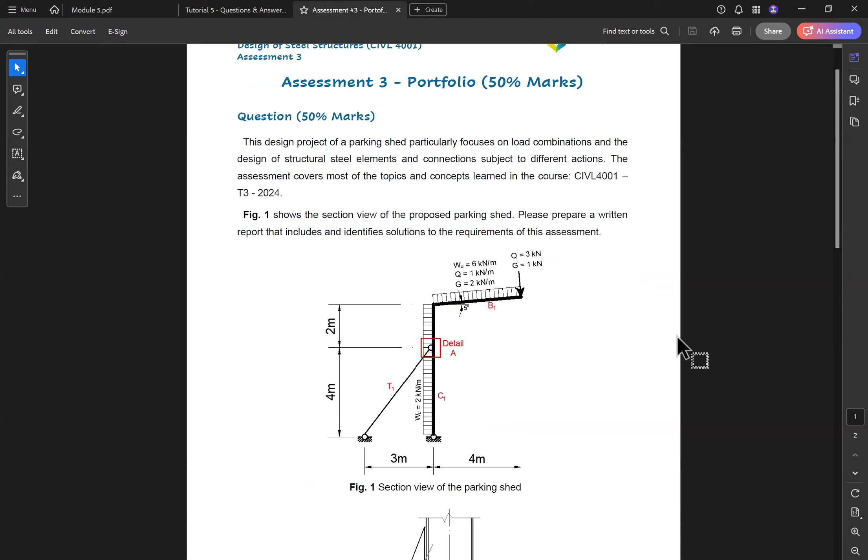Yeah, okay, so this is the quiz. It is not a very long one, sorry, this is the assessment portfolio, the last one we have in this course. So it's about calculating the load combinations and designing members. So we have some members, like T1 is a tensile force member.

And the column will be under normal force and bending moment, similar to what we will do today. And also we have a rafter or beam, and we also have a connection. So module 6 designs a connection connecting the column to the tie. Okay, so this is mainly the requirement of the assessment.

And also, one thing here is, using the loads, we need to draw the shear force diagram, bending moment diagram, and normal force diagram, and we need to check it with Space Gass software. You mentioned before that you have used Space Gass before, right?

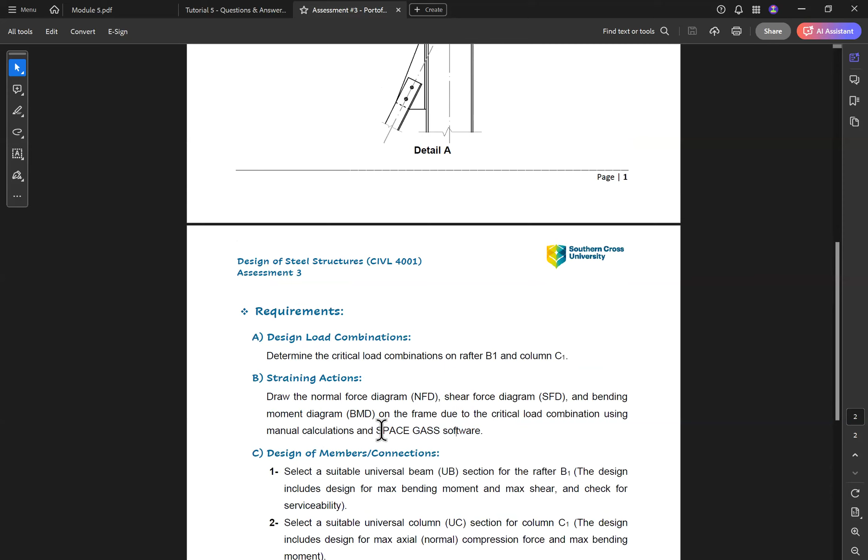Yeah, I used it a little bit, not too much. Only for the truss and joint. Yeah, it is a simple one, so I can help you draw the model, but just to link you to check your manual calculation with the software. Okay, yeah. Okay, and others, have you used the software?

I think you mentioned you have used it before, right? Or not all of you? Not Space Gass, but I've used Strand. Okay, same. Okay, so I can edit it and add Space Gass or Strand 7.

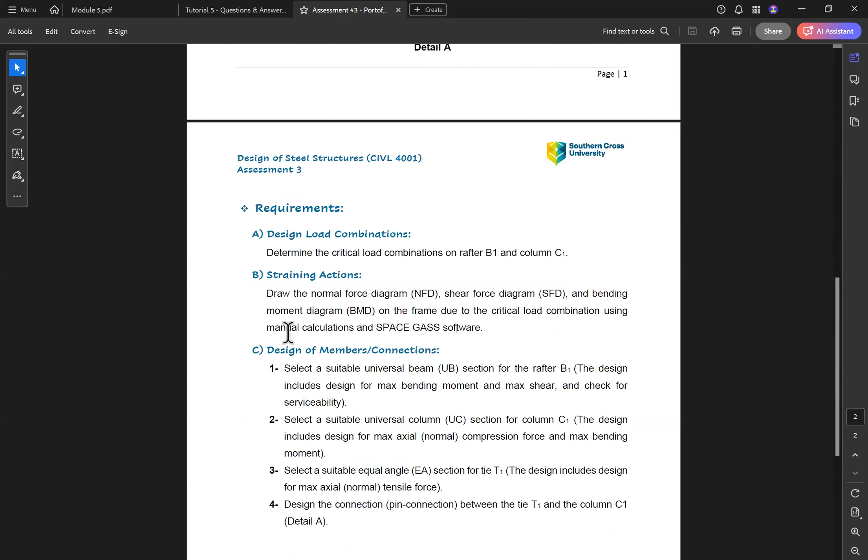I also have another question, if that's all right. At the top it says please prepare a written report, so do you want it to be a written report or only calculations? It just means do the calculation and so on. So you're only interested in calculations, we don't need to write an introduction or anything like that. Okay, just the calculation and the requirements only here. So what about explaining the critical load combination? Yep, calculations, no need for an intro and all that stuff. Okay, great, thank you.

So now let's start our topic for today. Today we will be looking at design of steel members subjected to combined action, similar to portal frames or frames in general.

Combined action means that we have two actions at the same time, for example axial force or normal force similar to a column, and also bending moment. This will happen mainly in frames, because the column and rafter in frames will have both of them. So this case is named combined action.

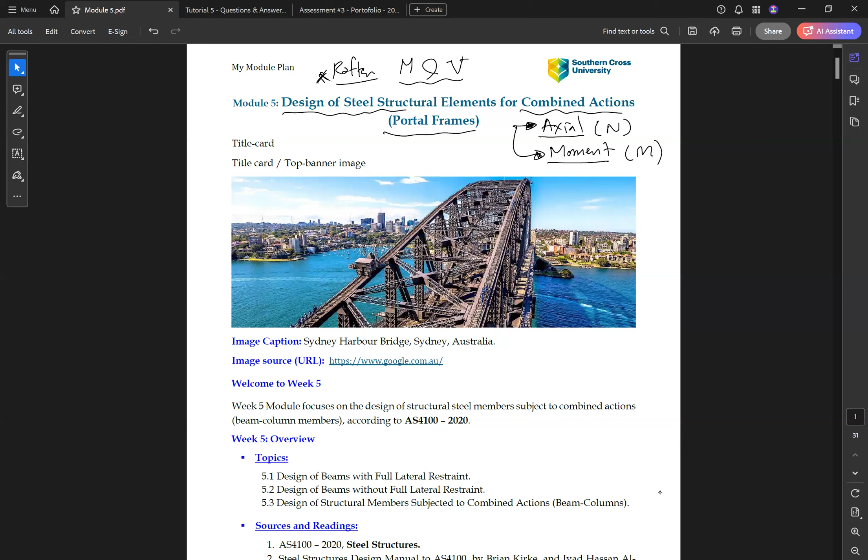There are several types of combined action, for example in rafters, sometimes we need to check the moment and shear together. This is also a type of combined action. So this is mainly our topic today for the week 5 module.

We will start with designing beams with full lateral restraint and design of beams without full lateral restraint, because last week we only talked about beams or rafters subjected to moment, but only with full lateral restraint. So here we will also talk about cases without full lateral restraint.

The third part is design of structure members subjected to combined action. These members can be called beam columns, and mainly in the combined action we have axial force N and moment M. These are the main actions we have. The sources for this module are the standard and the two reference books if you want to have a look at them.

So let's start with the design of beams with full lateral restraint. We have segments with full lateral restraint, according to clause 5.3.2 in the Australian standard. A segment may be treated as fully laterally restrained if it satisfies one of the following clauses, where the nominal member capacity calculated in accordance with clause 5.6 is not less than the following.

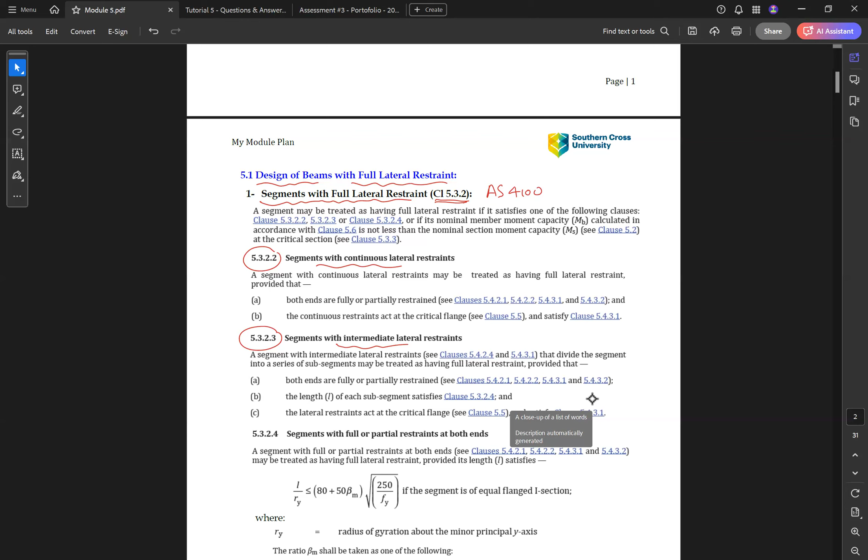Under this case we have two types: segments with continuous lateral restraint and segments with intermediate lateral restraint. For segments with continuous lateral restraint, these may be treated as having full lateral restraint provided that both ends are fully or partially restrained, and the continuous restraint acts at the critical flange.

The other case is segments with intermediate lateral restraint. A segment with intermediate lateral restraint that divides the segment into a series of subsegments may be treated as having full lateral restraint, provided that both ends are fully or partially restrained, the length L of each subsegment satisfies this clause, and the lateral restraint acts at the critical flange.

The idea here is about buckling, or global buckling of the member. As you know, when we have the beam cross section, it may be subjected to buckling.

We talked about this last week, so we might have something called, let's change the color here, so this one here - the section might be subjected to lateral torsional buckling, or LTB.

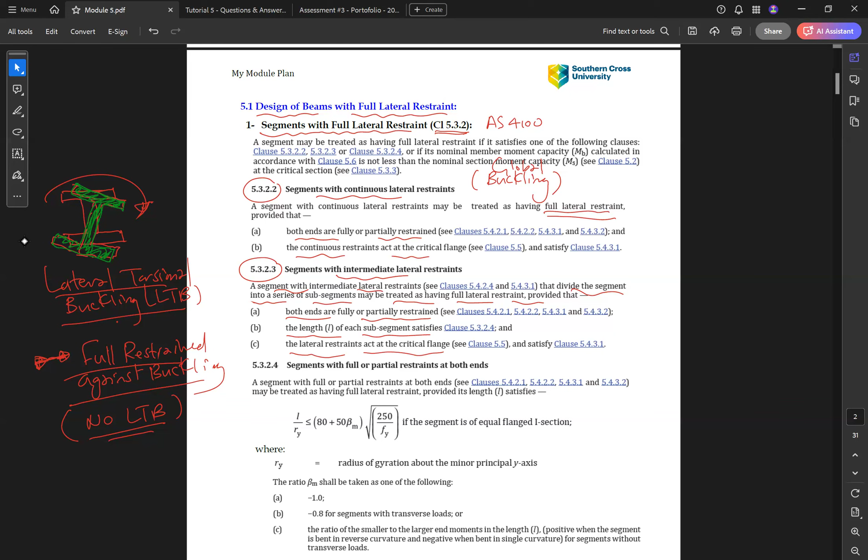We will see later how to apply this in the problem or the design. But if the segments are fully or partially restrained to satisfy these three clauses, or the continuous restraint acts at the critical flange - for example, if we have this section here, let's explain this.

If we have this beam and we have the moment like that, this bending moment, the critical flange in this case is the top flange because it is under compression. So if we have something to support the beam from both ends here, this is what is meant by lateral restraint. The beam is restrained, or the top flange is restrained, from displacement or rotation.

Okay, so the next clause is segments with full or partial restraint at both ends. Such a segment may be treated as having full lateral restraint if this condition is satisfied: L over Ry less than or equal to 80 plus 50 beta m root 250 over fy, if the segment is of equal flange I section. So again, if we have an equal flange I section similar to this, this formula applies.

Where Ry is the radius of gyration about the minor axis. So if we have two axes, this is the x-axis and the y-axis, so y is the minor axis and x is the major axis.

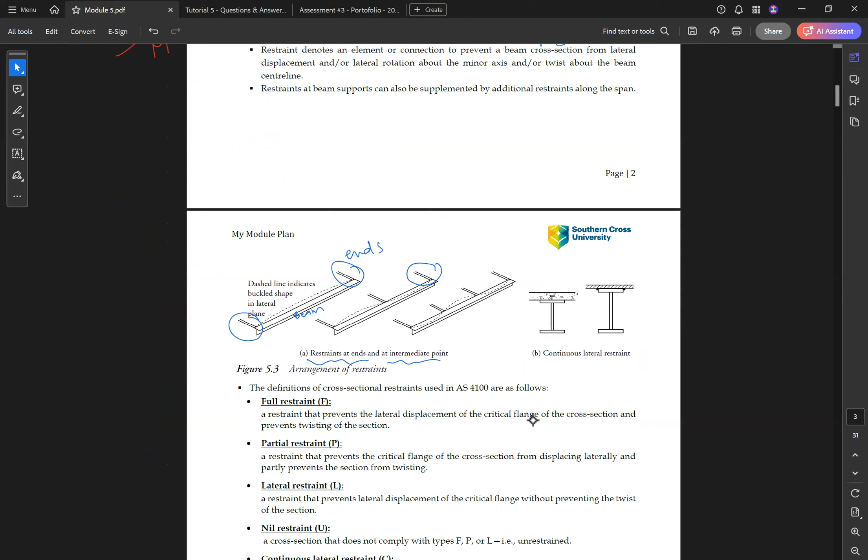If we have full or continuous lateral restraint, or intermediate, or full or partial restraint at the ends. Here is some explanation: restraint at ends and at intermediate points. So if this is our beam, here we have supports at the ends. Here we have two supports at the ends and one intermediate here. And here we have two at the ends and two intermediate. So this is what is meant by full or partial lateral restraint.

Restraint denotes an element or connection to prevent the beam cross-section from lateral displacement or lateral rotation about the minor axis, or twist about the beam center line. So this is to prevent or reduce the lateral torsional buckling. Restraint at beam supports can also be supplemented by additional restraint along the span. So you might have restraint at the two ends, or you can replace them with some restraint at the span.

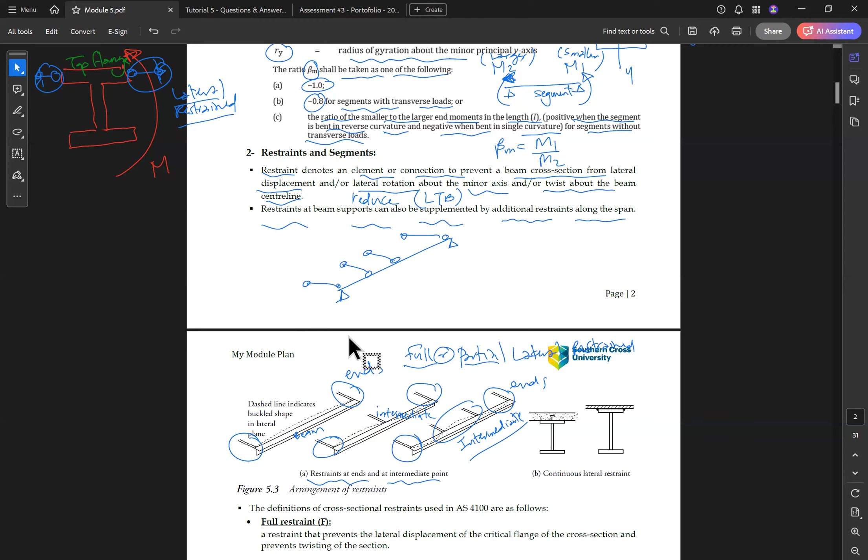Okay, in the standard, we have some definitions for the cross section. So we can have a section of full restraint or partial restraint, because this will affect the design, this will affect the design formulas in the standard. So we can have full restraint section, partial restraint, and we also have lateral restraint, and we have nil restraint or continuous lateral restraint, and lateral rotation restraint. So that's 6 definitions we need to know.

So for full restraint, take the symbol F. It is a restraint that prevents the lateral displacement of the critical flange of the cross section and prevents twisting of the section. So if we have a restraint that prevents all the lateral displacement, this is considered a full restraint section. Partial restraint, or P, is a restraint that prevents the critical flange of the cross section from displacing laterally, and partially prevents the section from twisting.

So partial restraint means we prevent displacement fully or completely, and prevent twisting partially. Full restraint prevents displacement and twisting fully.

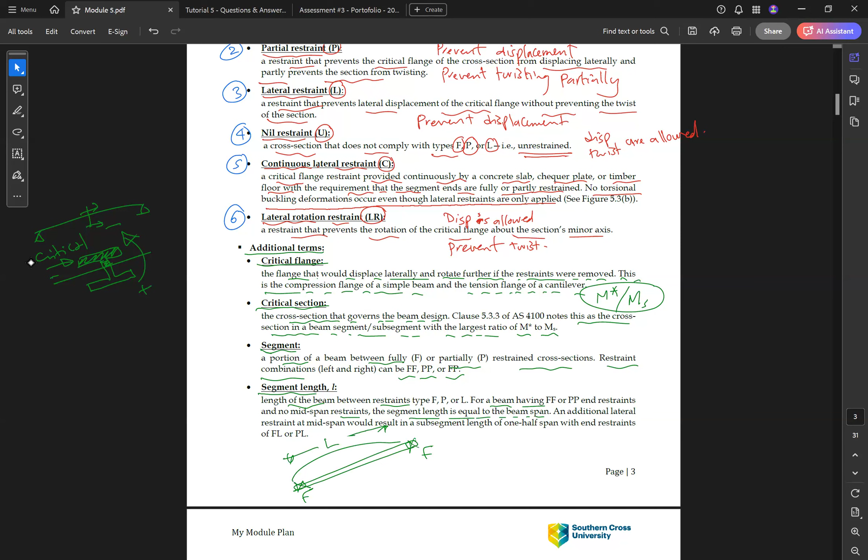Segment length L is the length of the beam between restraint types, whether fully, partially, or lateral restraint. For a beam having FF or PP end restraints and no mid-span restraint, the segment length equals the beam span. So if we have a beam with this end F and this end F, and no other intermediate restraint, the segment length here is L, which is the beam length.

An additional lateral restraint at mid-span would result in subsegment lengths of one half span each, with end restraint FL or PL. So if we have the same beam, fully restrained here and here, but we add a lateral restraint in the middle, this is L by 2, or the segment span, and the connection now becomes FF with the middle as L. So this segment is FL, segment 1 is FL, and segment 2 is also FL.

So the segment length, or the segment span, is affected by whether we have lateral support or not for the rafter.

A subsegment means the segment can be further subdivided into portions having at their ends at least lateral restraint L to the critical flange. Restraint combinations can again be FL, PL, or LL.

So if we have two middle lateral restraints, the segment can be subdivided into subsegments. So this can be subsegment 1, subsegment 2, and subsegment 3.

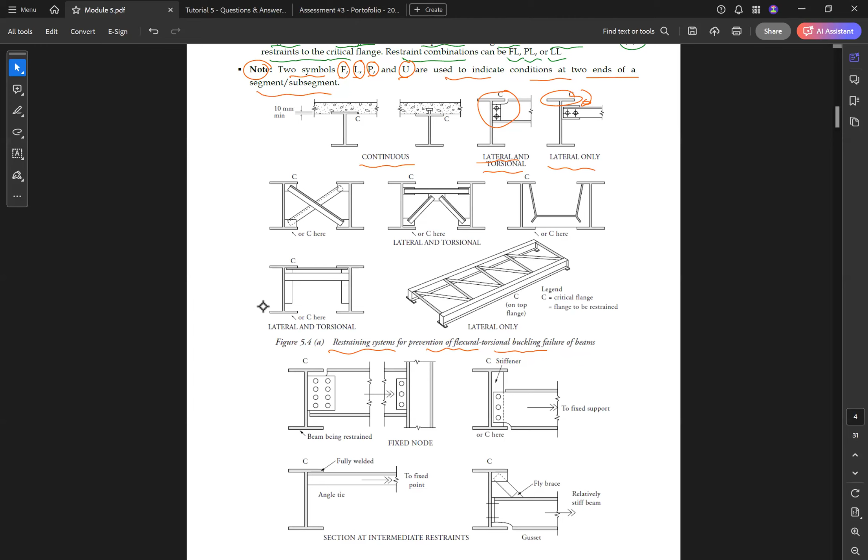Okay, so these are a few examples you can have a look at, and also here some other examples for the full restraint for beams.

So here, one example: we have an angle welded to the top flange, so the top flange is fully prevented. Here as well, we have a fly brace connected to the top flange, also preventing the lateral rotation and the lateral displacement.

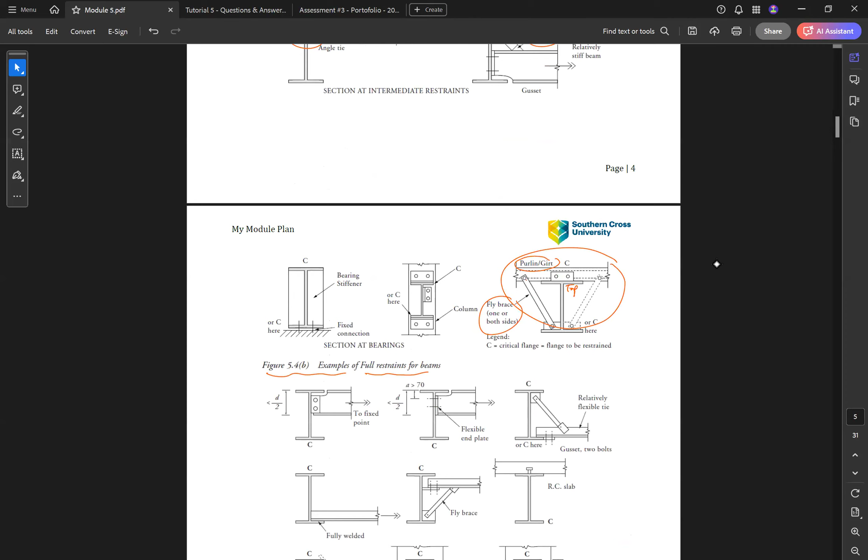Here as well, we have this connection. So here we have fly bracing and a purlin connected to the top flange, so the top flange is not allowed to move, whether horizontal displacement or rotation. And here this diagram, 5.4c, is also another example for partial restraint.

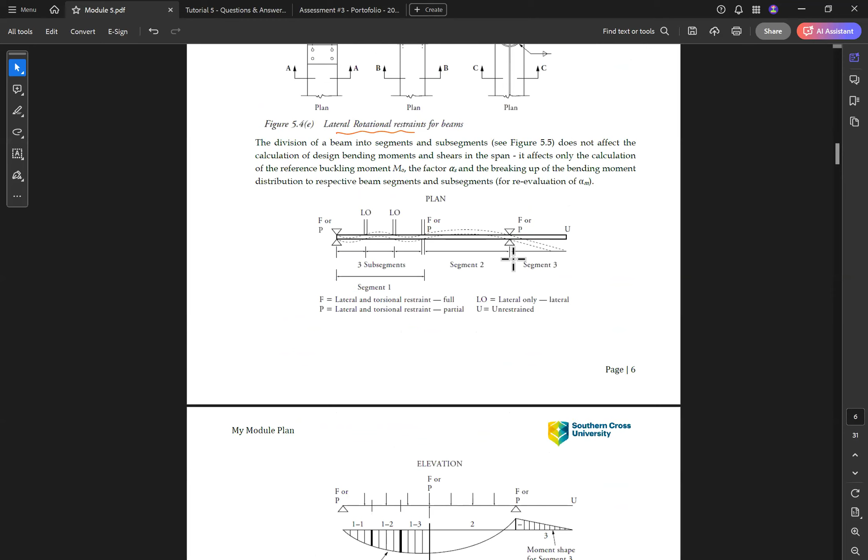The division of a beam into segment and subsegment, similar to figure 5.5 here, doesn't affect the calculation of the design bending moment and shear in the span. It only affects the calculation of the reference buckling moment M naught. So this division or subdivision will not affect our calculation for moment, but it will affect the buckling capacity of the beam itself, which is M naught. We will have M naught in the formulas later - the factor alpha S, and the breaking up of the bending moment distribution to respective beam segment and subsegment for reevaluation of alpha M.

So the factor alpha S is just a breaking up of the bending moment distribution. So it reflects the redistribution, or the distribution, of the moment on the beam segment.

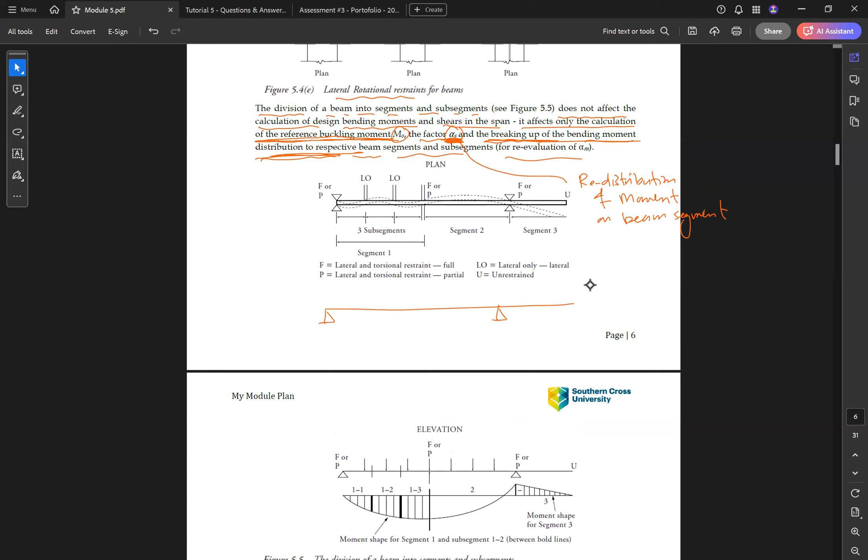Okay, similar to this example here. So if we have this type of beam - this is the elevation, this is the plan view, and this is the elevation view. In the elevation, we have a simple beam with a cantilever. If we have some loads like this, the bending moment will be something - this is just an example. So we have negative moment here, positive moment here. This is the bending moment, similar to this diagram here.

But in the plan, if you look at the plan view, we have full or partial support here, no support here horizontally, and also full or partial support here, and lateral supports here, and full or partial at the middle here. So the buckling of this one in the horizontal direction will follow something like this dotted line, or this blue line. So this is what is meant by segment. The segment only affects the horizontal direction, or the lateral torsional buckling. But for the bending moment, or vertical bending moment, there is no effect from the segments.

So this is what is meant by this statement here. If we look at the subdivision, we have this is a segment, this is a segment, this is a segment, this is another segment, this is another - so we have segment 1, segment 2, segment 3, segment 4, segment 5. So this is our segments. This subdivision will only affect the horizontal direction.

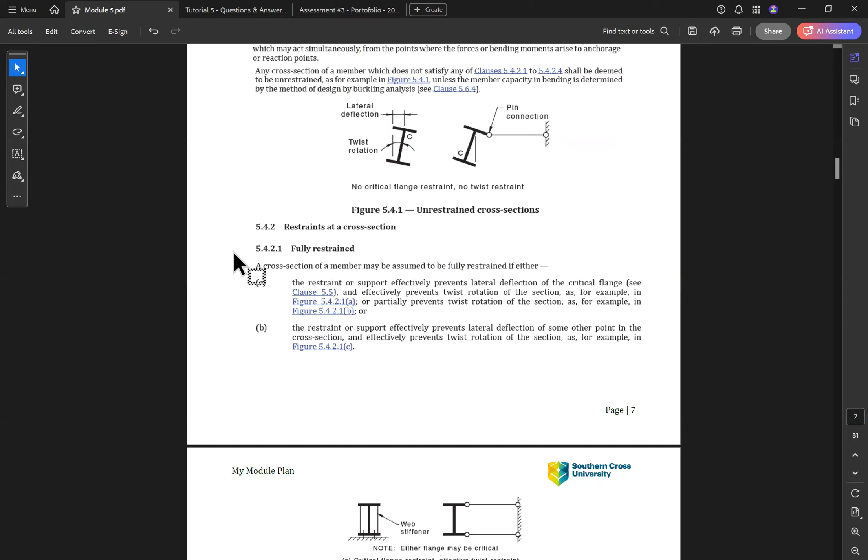Do you have any question, guys, up to now? Nope.

Okay, so thank you. So to continue quickly, this section also gives us the restraint definition in the Australian standard. For example, this gives us figure 5.4.1, unrestrained cross section. In this unrestrained cross section, there is no restraint, so the deflection is allowed and the twisting is allowed.

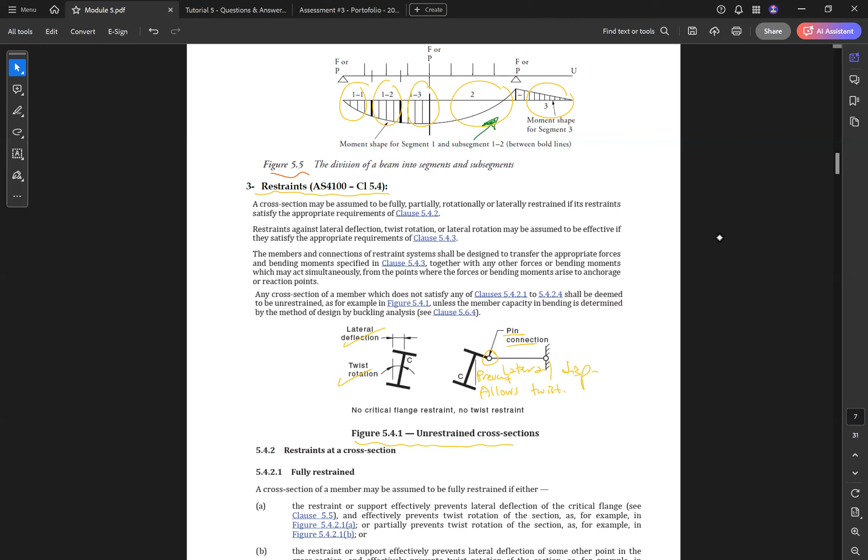Another type is we have a pin connection. When we have the pin connection, this will prevent the lateral deformation, but the twisting will stay. So if we have a pin connection, this can prevent lateral displacement but allows for twisting. So this is the general case where we don't have any restraint.

And the fully restrained - this standard gives us some examples of fully restrained. Here, the critical flange restraint, effective twist restraint. So if we have a connection at the top flange and bottom flange, this will prevent displacement and also twisting. And here also there is a connection of the critical flange to the slab or so on, and also we have a web stiffener. So this is another example of fully restrained.

On this one, we have critical flange restraint, but partial twist restraint. At the top here, we have a flexible connection, so the member is flexible. So this cannot be considered as fully restrained, but it can be considered as partial for twisting. And because the connection prevents the movement, or horizontal movement, of the beam, it is not allowed for displacement.

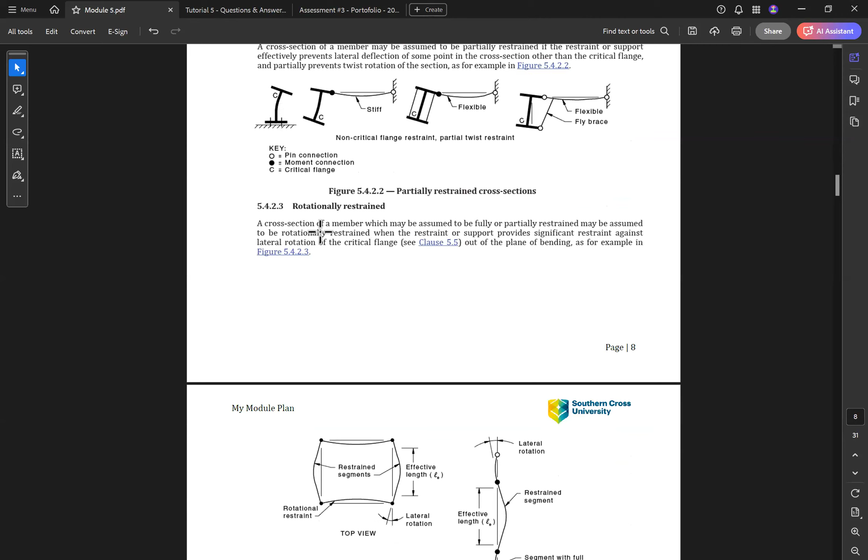Okay, so these are just a few examples of the definitions exactly as in the standard. You can have a look on this. It's just a repetition of what we made earlier: partial restraint, rotational restraint, and so on. So let's go to the...

calculation or the procedure of the bending moment capacity for the beam. So member capacity of segments with full lateral restraint is our first step. If we have the beam with full lateral restraint, we have to follow this procedure. The first thing is calculation of the nominal member capacity, MB, of a segment with full lateral restraint, which shall be taken as the nominal section capacity of the critical section.

So to simplify this, for rafters or beams we have two capacities: the section capacity of the beam, and the member capacity of the rafter or beam. The section capacity MS and the member capacity MB. So if we have full lateral restraint, this means there is no lateral torsional buckling, and this makes MB, the member capacity, equal to the section capacity. So the nominal member capacity equals the section moment capacity for full lateral restraint.

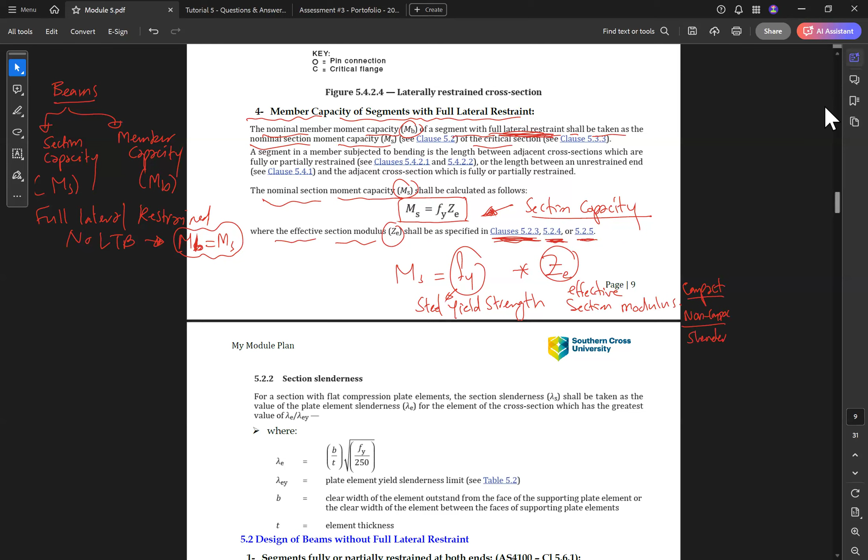Okay, which is the effective section modulus based on these three clauses: one of these three clauses, if the section is compact, non-compact, or slender. So we have these three types of sections: compact, non-compact, and slender.

The section slenderness, lambda, for a section with flat compression plate elements shall be taken as the value of the plate slenderness lambda E for the element of the cross section which has the greatest value of lambda E over lambda Ey. So we'll have lambda effective for flange or lambda effective for web based on this. If it's flange, B flange over T flange, times F yield over 250. For web, B web over T web, times F yield over 250. And we have the plate yielding limit slenderness from table 5.2.

Then we have lambda E over lambda E yield for flange and lambda E for web over lambda E yield for web, and the value of the plate is the greatest of them. So we'll calculate both, and for the section, lambda E will be the greatest. Because the section consists of flanges and webs, we calculate for flange and for web, and the whole section value will be the greatest value of them.

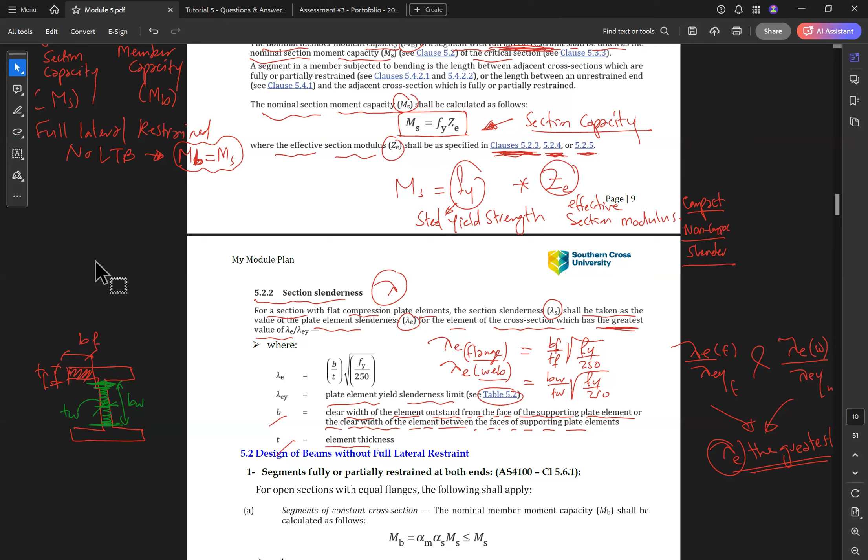So for the first case, if we have full lateral restraint, there is nothing new compared to last week. We have MB equal to MS equal to F yield times Z effective, and Z effective is based on lambda E over lambda E yield. So we have three types: compact section, non-compact section, or slender section. Based on this, you can find ZE and then you can find MB.

The new part this week is the design of beams without full lateral restraint, which may be a common case if we don't have full lateral restraint for the beam. So the value of MS doesn't equal the value of MB. So what do you expect—MS more, or MB more than MS?

Do you have any idea? Nothing? Okay. Because MS is the section capacity, this is the maximum that the section can achieve. So MS will always be more than MB in the case of no full lateral restraint, or beams without full lateral restraint.

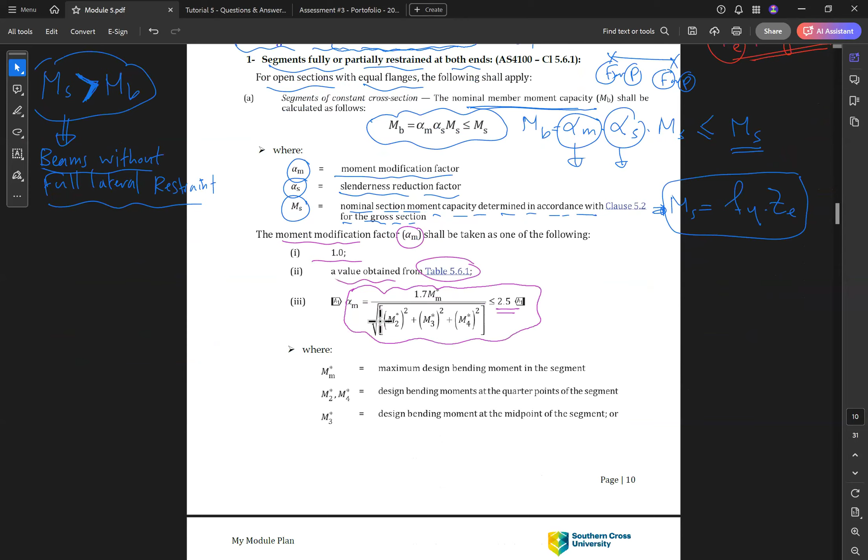Okay, so we can take table 5.6.1. Let's have a look at this table. This is table 5.6.1, the moment modification factor alpha M for a segment fully or partially restrained at both ends.

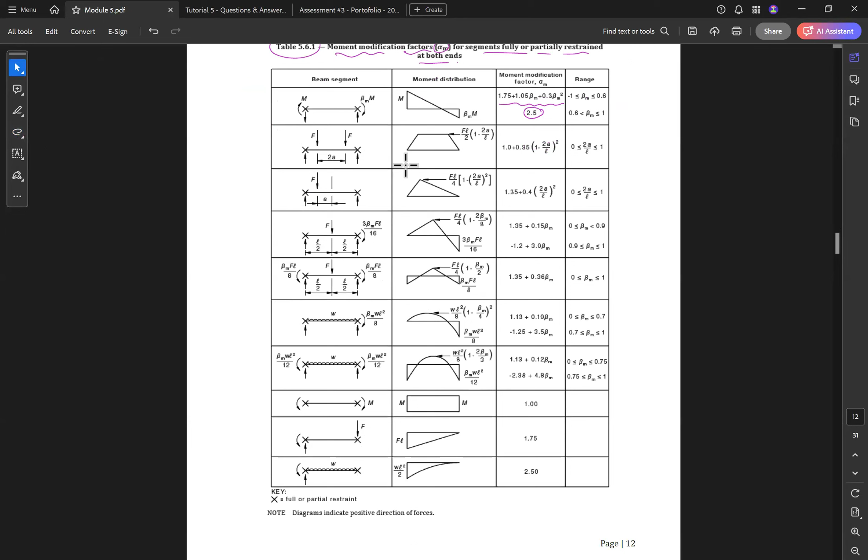Here is an example. If we have a beam with two moments, M and beta M times M, this is the moment distribution, so this shall be the value of alpha M, and not more than 2.5. All these cases, one of them shall be taken depending on what is the moment distribution on the beam segment here or here and so on. Take the value of alpha M depending on your case.

The general formula is alpha M equal to 1.7 times M star M over the square root of M2 star squared plus M3 star squared plus M4 star squared, all under the root, where M star M is the maximum design bending moment in the segment, M2 and M4 are the design bending moments at the quarter points of the segment, and M3 star is the design bending moment at the midpoint of the segment.

For example, if we have a beam with a moment distribution like that, the maximum moment in the middle is M star, and M2 and M4 are located if this is L, we have 4 quarters: L over 4, L over 4, L over 4, L over 4. So this is M2 and this one is M4 star. In this case, M3 is the design moment at the midpoint, so M3 star equals M star. This is just a simple example of the segment if we have a bending moment similar to this.

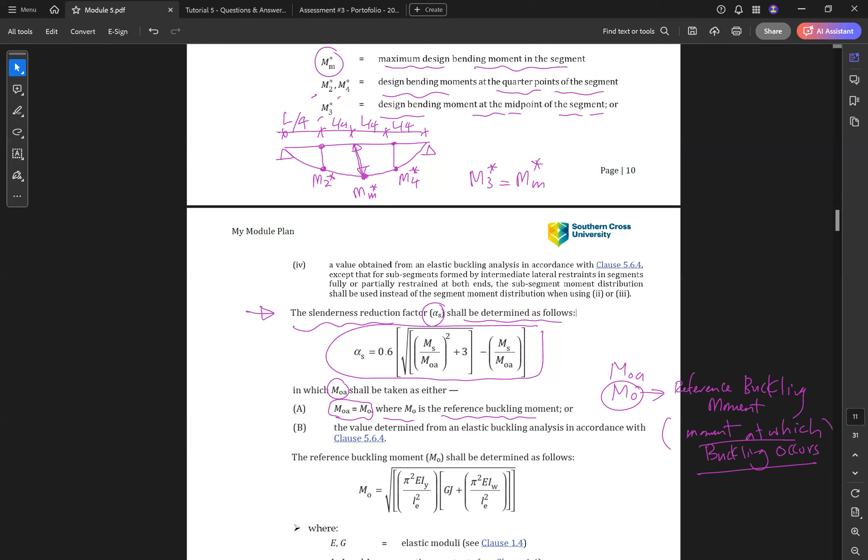Where MOA is equal to M naught, where M naught is the reference buckling moment. So we have MOA and MO. MO is the reference buckling moment, or in other words, the moment at which buckling occurs. So at this moment, buckling should initiate in the beam.

The reference buckling moment M naught will be given or determined using this formula: M naught equal to pi squared E IY over LE squared, times G J plus pi squared E IW over LE squared, or effective length squared, where E and G are elastic moduli. For steel, ES equal to 2 times 10 to the power 5 MPa, and G is called the shear modulus. So E is the elastic modulus or Young's modulus, and G is the shear modulus.

This one is 80,000 MPa, and this one is 200,000 MPa, and IY, J, and IW are section constants, and we will find them, these can be taken from the design tables, the design capacity table, given that IY is inertia about the y-axis, J is the polar moment of inertia, and IW is the warping coefficient for the section. So these are the 3 parameters required to calculate the moment MO.

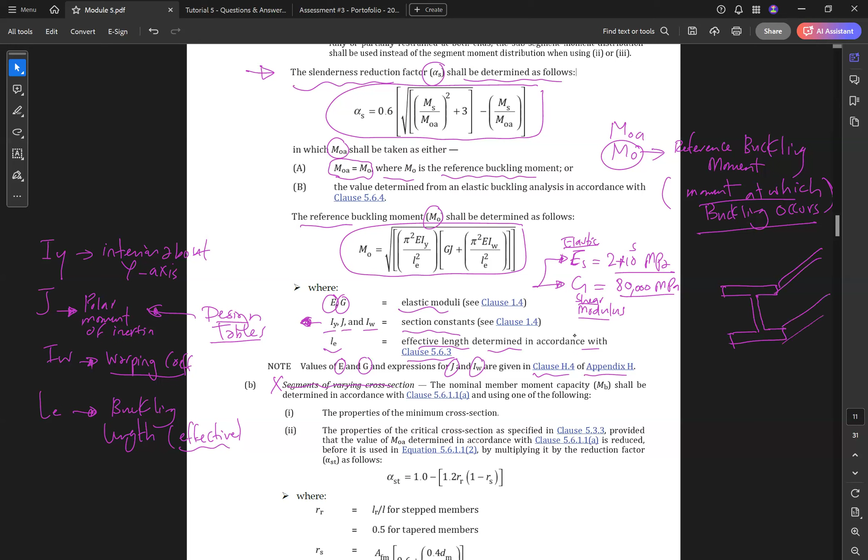Okay, for segments with varying cross section, we can neglect this. We don't need this one now, so we can skip this. This is for sections with a regular cross section, or where the section of the whole beam is constant with no change in the section, so the formulas are applicable. So alpha S, alpha M, alpha, and also MO are the same. Okay, so this is the formula for M naught or MO.

So now for segments, the other case we have a segment unrestrained at one end. For example, a cantilever. One end is restrained and the other end is unrestrained. This may be like the case in your assessment C3.

So for a segment unrestrained at one end, the nominal member capacity MB is of a segment unrestrained at one end and, at the other end, either fully or partially restrained, or laterally continuous, or restrained against lateral rotation. So one end unrestrained, other end restrained fully or partially, because one of them should be fixed.

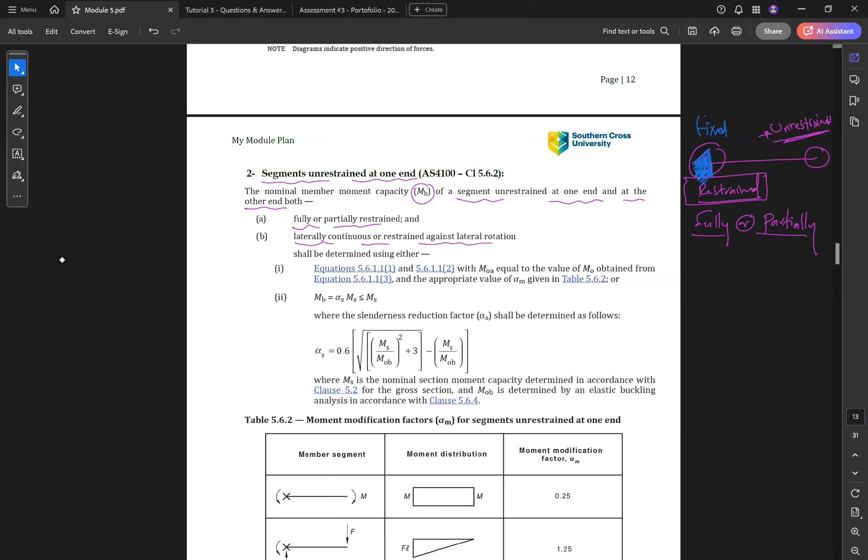In a cantilever, one of the ends should be fixed, meaning it is restrained fully or partially, or continuously restrained. So in this case, this equation uses MO equal to the value of M naught obtained from equation 5.6.1, and the appropriate value of alpha M given in table 5.6.2, or MB equal to alpha S times MS. So if we have one restrained and one unrestrained end, MO in this case will be equal to MOA, and you can use the previous case, or use this formula here.

So we have MB equal to alpha S times MS. This means there's no alpha M in this case. The slenderness reduction factor alpha S shall be determined as follows, and the formula changes here.

Alpha S equal to 0.6 times the square root of MS over MOB, all squared, plus 3, under the root, minus MS over MOB. This is alpha S, where MS again is the nominal section capacity, and MOB is determined by elastic buckling analysis according to clause 5.6.4.

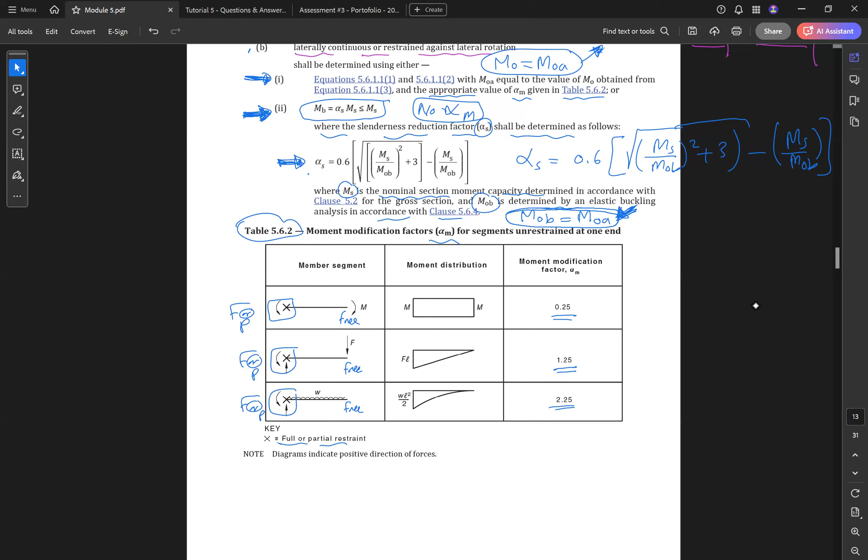So to summarize, we have two options. Option one is to use the previous equation but just replace MOA with MO and use similarly. The other option is using the formula MB equal to alpha S times MS, and then find alpha S using this formula. So there are two options to calculate MB for one end restrained and one end unrestrained.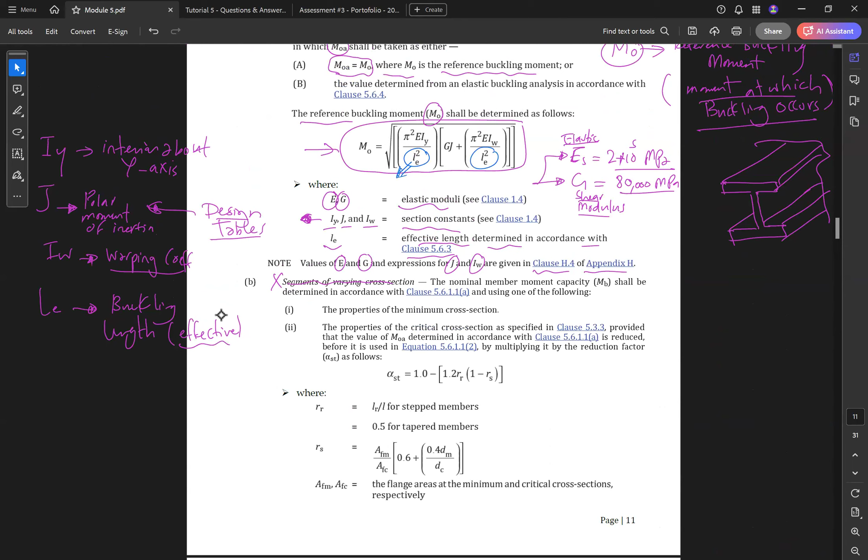Then in the formula, if we go back here, in MO there is a parameter which is L effective. So how to calculate L effective, or the buckling length? The buckling length, or effective length LE, according to clause 5.6.3, LE shall be calculated using this formula: LE equal to KT times KL times KR times L.

KT is the twist restraint factor given in table 5.6.3a, KL is the load height factor from the next table, and KR is the lateral rotation restraint factor. If we look at the KT factor, it depends on the cases at the two ends restrained. F means fully lateral restrained, FL fully restrained and lateral restrained, LL lateral restrained, PP partial restrained. So KT can be equal to 1, or this formula, or this formula.

And also, if we look at a cantilever, we have U here, F here, so KT equal to 1. This is just an example. For other simple beams, if it is fully restrained, you can also take it as 1. If you have other conditions, you can substitute into these formulas.

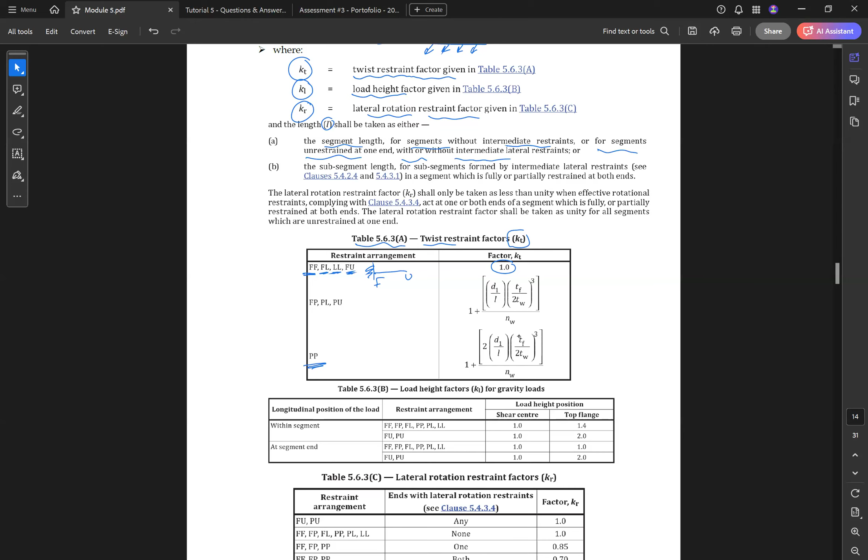For the length L, this is the segment length for a segment without intermediate restraint, or for a segment unrestrained at one end, with or without intermediate lateral restraint. Or L can be the subsegment length for a subsegment formed by intermediate restraint. So again, as discussed earlier, if we have this restraint, this is L, this is L, or L over 2 if it's the total L. This is the length of the segment because we have a lateral or intermediate restraint.

For the factor KL, from table 5.6.3b, it again depends on the restraint arrangement within the segment at the segment end. So if we are calculating for the segment, we have full, and full partial, and so on, for load height position at the shear center or the top flange.

What does this mean? If we have a section, it can be loaded on the top flange — this will be case 1, or another option is the section is loaded at the shear center — this is the second case. Depending on the location of the load, or the load height position, KL can take the value of 1 or 1.4. As you can see, for the shear center the factor is 1, but if the location changes, it will be changed accordingly.

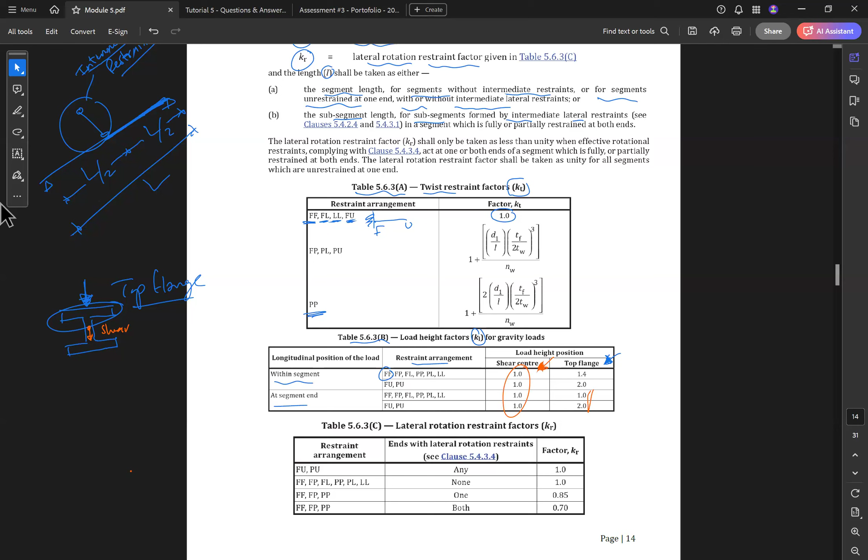And the third factor is the lateral rotation restraint, KR, table 5.6.3c. So again, the restraint arrangement depends on the ends and whether there's lateral rotation restraint or not. If we have a cantilever, so U and fully at one end, in this case KR should be taken as 1. And if you don't have any rotational restraint, this means KR equals 1 as well. So it depends on the restraint ends and also the existence of lateral rotational restraint.

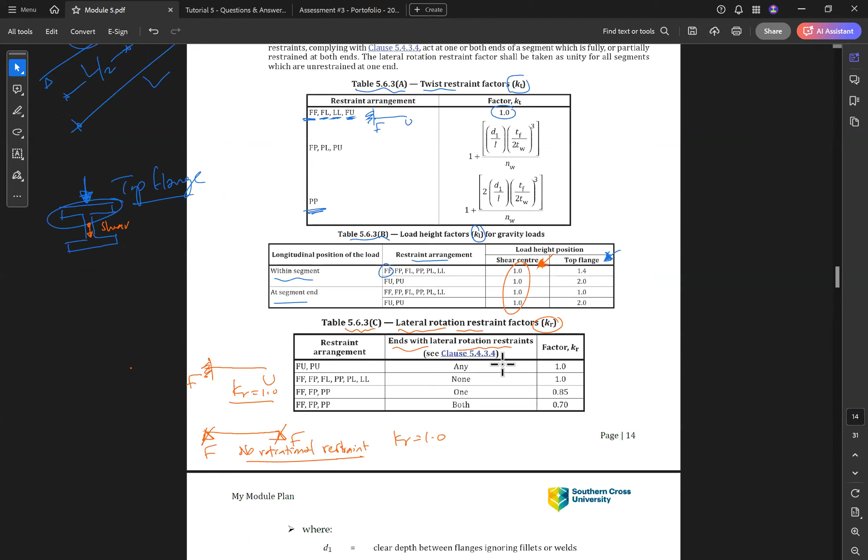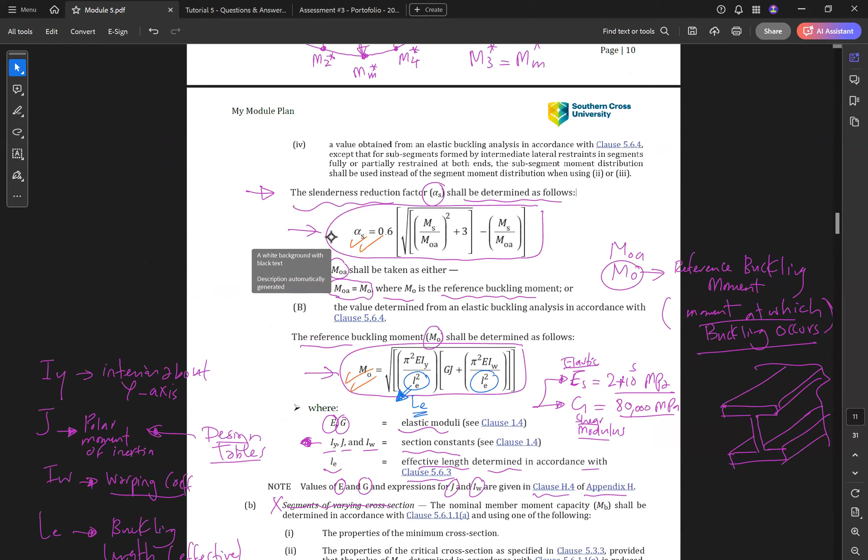So if we got the values of KT, KL, and KR, and we have L, we will find the buckling length LE, or the effective length LE. Using LE, we can find the value of M naught. Using M naught or MO, we can find alpha S, and using alpha S, we will find the value of MB. So to calculate the member capacity, it's a bit of a long procedure. We need to find the value of alpha M and alpha S, and the value of alpha S depends on MO and MOA. MOA depends on LE, which can be calculated as KT, KL, KR times L. So this is how to find the value of MB.

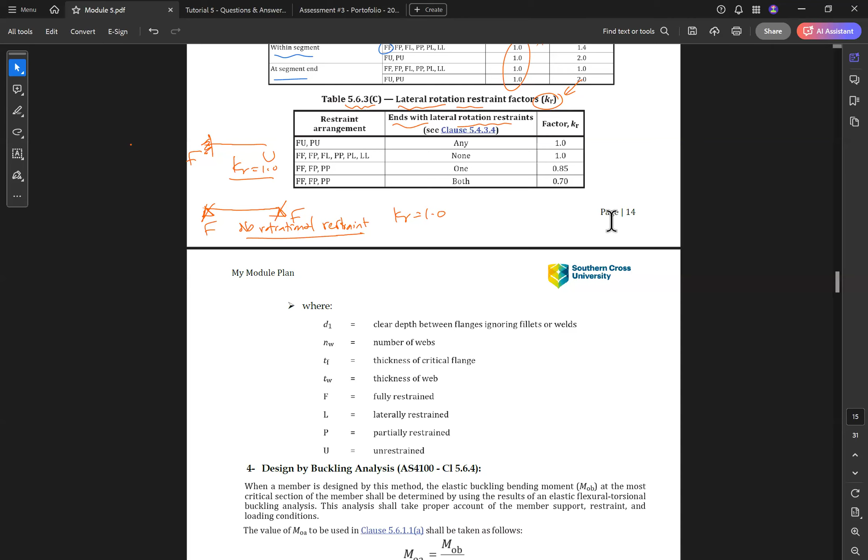Do you have any question, guys, for the member moment capacity? No. Okay, thank you.

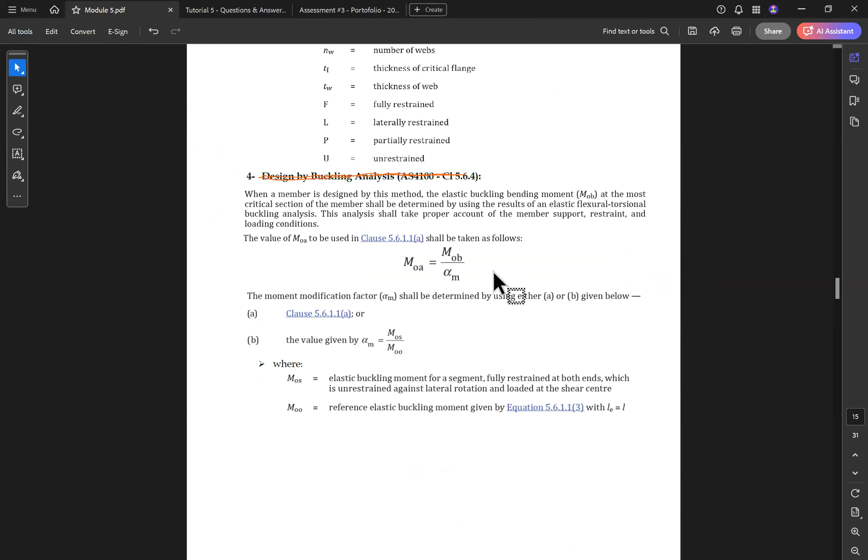Okay, another method of design is design by buckling analysis. You can just ignore this one, maybe just for reading if you want to have a read. So this is another method to find MOA. We can skip this one.

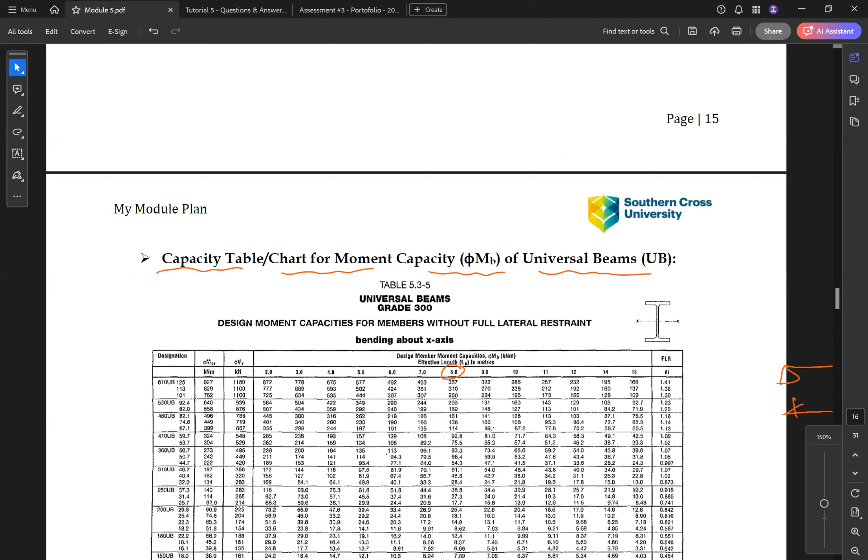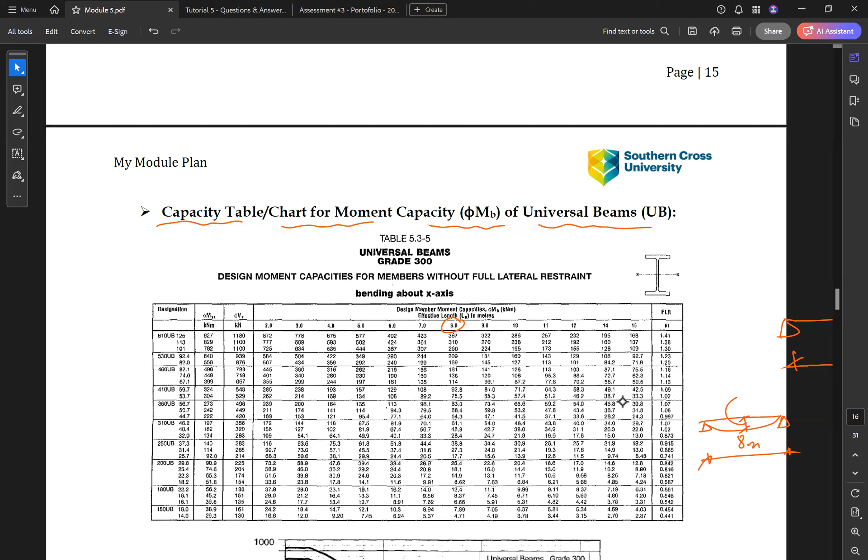So this table or chart, how to use it? For example, if we have a beam with 8 meters span, and the moment is given to us, say 300 kilonewton meter. So here 8 meter LE, and the moment is 300, so it is somewhere between 310 and 260. So what section should we use? The closest one. What section do we use to design this beam? We can use 610 UB 113, for example. So this is one option to use directly without calculating all the formulas and so on, but it's not the one we use in this course. We need to follow the calculation.

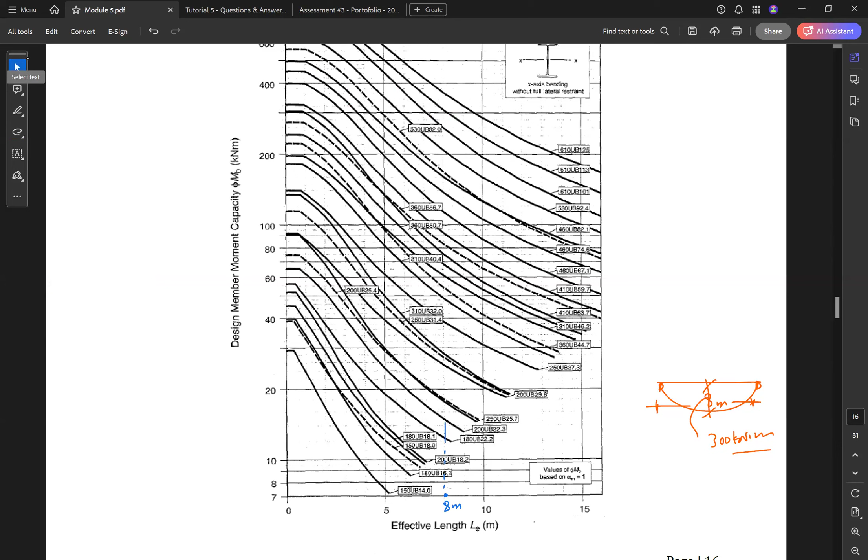Another option, similar to before: if we have L effective same 8 meters, and the maximum moment as 300 kilonewton meter, using this chart, which is drawn using the previous table, for example at 8 meters we go up straight until we reach 300 kilonewton meter, the moment, and go horizontally. So the two lines intersect here, between this section and this section. So which one to choose? The largest one. So this will be our selected section, which is 610 UB 113.

And this is for universal column section, if you want to use that. Same procedure. So this was for the beams with lateral and without lateral restraint. Do you have any question about this? Because next we will go to the next topic, which is combined action.

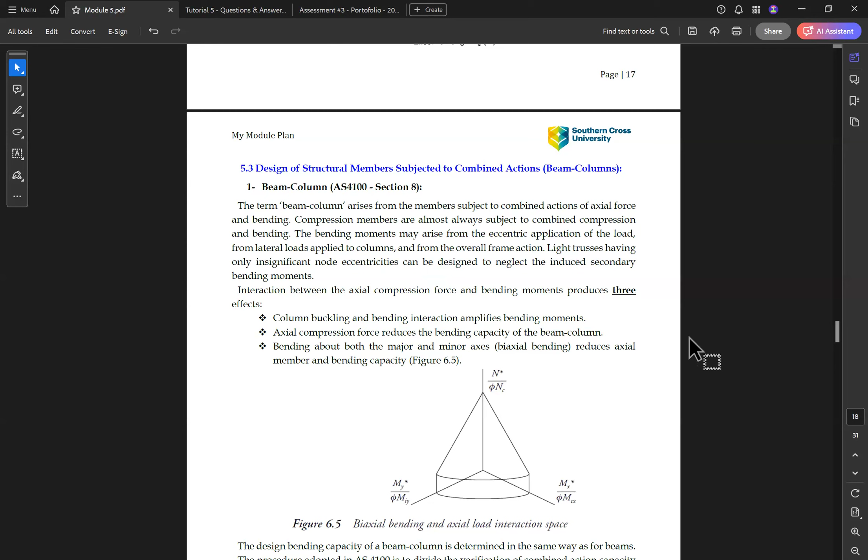It seems might all be right. Yeah, it's just, of course, thank you, just to go to the details. No, thank you. Just to go into the details, so maybe a bit complicated, but when you solve an example, it will be straightforward.

So now let's go to the next part, which is members subjected to combined action, or beam column. In this section, the beam column definition is according to, or covered by, section 8 in the standard. The definition of the beam column arises from the member subjected to combined action: axial force and bending moment. So this section is subjected to axial or normal force and bending moment M.

So this is a combined action member. Compression members are almost always subject to combined compression and bending. So most of the time, generally, the columns or beam columns or compression members are under normal force and also under moment. The section of the columns, especially in frames or portal frames, are subjected to axial force and moment. The bending moment may arise from the eccentric application of the load, from lateral loads applied to the column, and from the overall frame action.

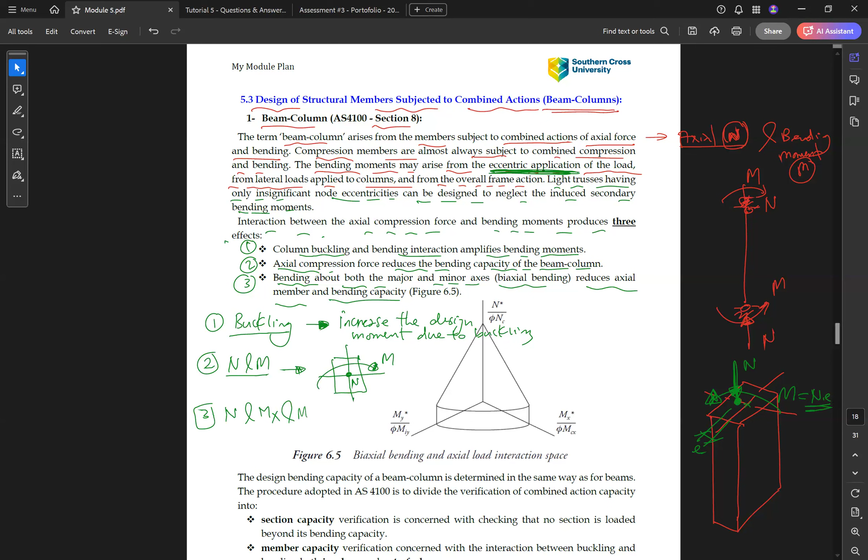The second is we have N and M over the section, but about only one axis. In some cases we have this cross section with normal force and one bending moment. The third is we have normal force, moment about X, and moment about Y, so we have two types of moment: N, My, and Mx. This case is called biaxial loading or biaxial bending. The previous case is called uniaxial bending. Uniaxial means one bending moment, biaxial means we have two bending moments.

So these are the three interaction cases that we can have: normal force and bending moment. And this diagram is the interaction diagram between biaxial bending and axial loads.

In this case, this just tells the limits. So any point inside this diagram means the column is safe. If the point is outside, this means the column is unsafe. Another meaning of this is when you have zero moment X and zero moment Y, the value of the normal force is maximum. If you have a value of Mx and a value of My somewhere on the curve, what happens to the normal force? It becomes smaller. So if Mx or My exists, this will reduce the normal force capacity, or the axial capacity, because this is like a limitation. The highest limit to reach in N is when the moments are zero, but when you apply moment, the section will be weaker in normal force, or the capacity will be reduced.

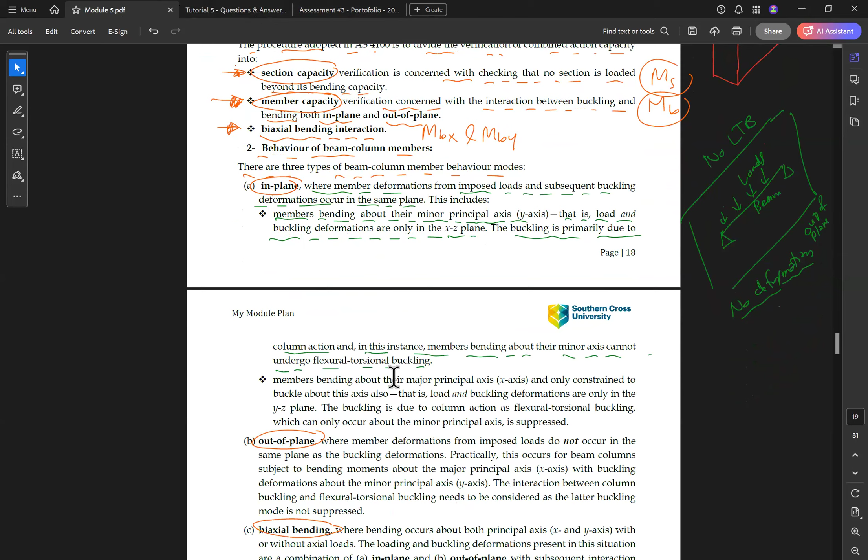Members bending about their major principal axis are only constrained to buckle about this axis, meaning load and buckling deformation are only in the YZ plane. The buckling due to column action, known as flexural torsional buckling, can only occur about the minor principal axis, which is suppressed here, so there is no option to buckle about its minor axis.

Again for columns, if this is a column, this is the plane of the column. The column will only buckle in the plane, this direction or this direction, but it will not go outside of the plane. This is called in plane behavior. So this is the interpretation of these two statements: the members will buckle only about the minor axis and nothing outside of the plane.

The other mode is out of plane buckling, where the member deformation from imposed load doesn't occur in the same plane as the buckling deformation. Practically, this occurs in beam columns subjected to bending moments about their major axis, the x-axis, with buckling deformation about the minor principal axis. The interaction between column buckling and flexural torsional buckling needs to be considered, as the latter buckling mode is not suppressed.

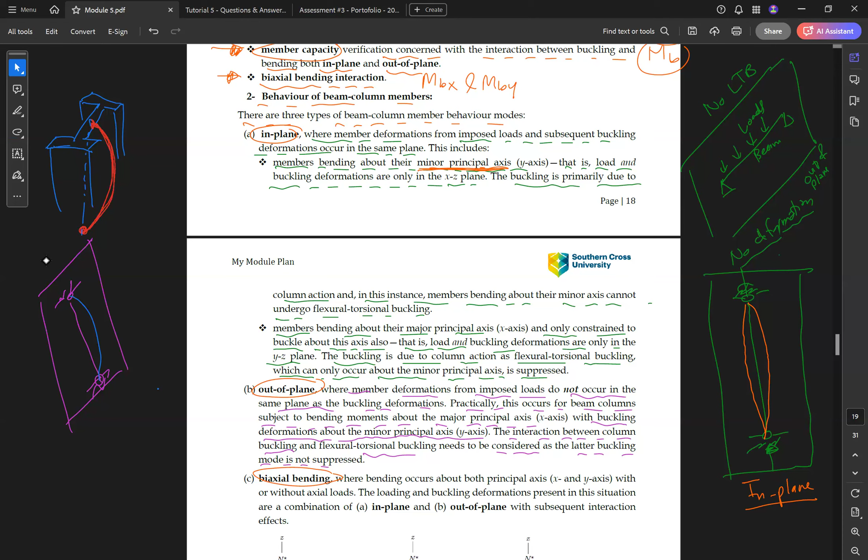The third case is where the bending moment occurs about both principal axes, x and y, with or without axial load. The load or buckling deformation present in this situation is a combination of in-plane and out-of-plane with subsequent interaction effects. So the third case has buckling in both directions, x and y.

This case shows what we discussed: combined axial compression and bending. Case A is in plane buckling about the weak axis with column buckling. In this case, this is the plane of the column, and the column is under load, so the buckling happens inside this plane, this way or this way.

For case B, in plane bending about the strong axis with column buckling. In this case, because of the moment direction, here the moment is in this direction about y. So case B is still in plane, but the plane this time is this plane. So this is our column, and again the buckling occurs in the plane. So this is in plane, and this also is in plane.

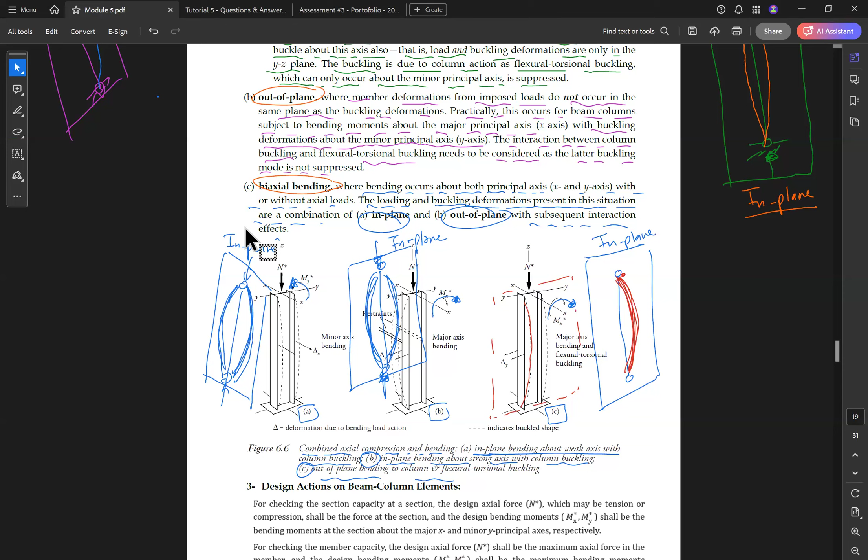The design action for beam column elements, to check the section capacity at the section, is the design axial force. So we have N star, the axial force, which may be tension or compression. This is the first one.

And the design bending moments: we have Mx star and My star, where Mx is the moment about the x-axis and My is the moment about the y-axis, being the bending moment about the major axis and minor axis. To check the member capacity, the axial force shall be the maximum axial force in the member, and the design moments are the maximum bending moments. So we have three straining actions in this case: one is normal force, and two and three are the bending moments.

Mx star and My star are the design bending moments resulting from framing action and transverse loading, and they include the second order effects. So from the bending moment diagram and so on, you can find Mx and My.

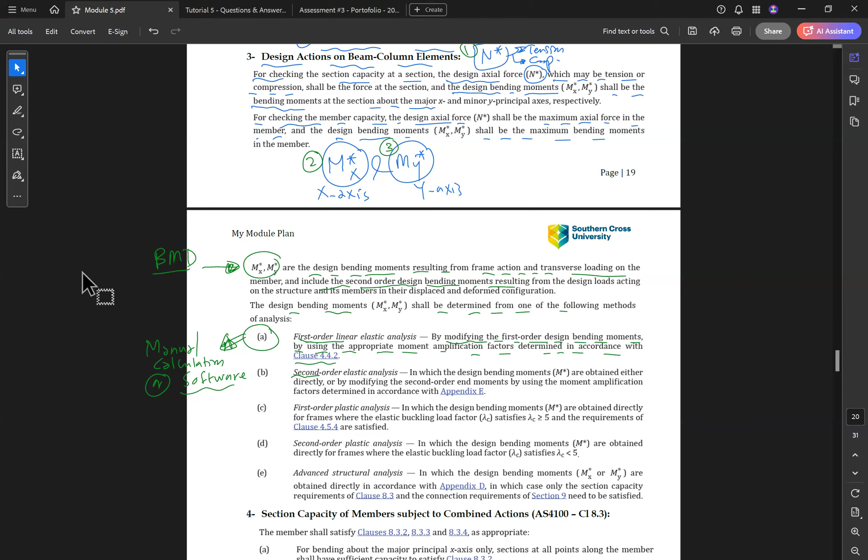Or software, using the option of linear elastic analysis. We don't have to use this in this course, but for your information, there are other advanced types of analysis like second order analysis, which takes into account more effects like buckling or member buckling effects. These are other options of analysis, but we don't need to use them in this course.

But next is how to design, or how to find the section capacity and member capacity for members subjected to combined action. So this is the design procedure for this type of member.

The first case is if we have uniaxial bending moment about the major axis, so we have N and Mx. If this is our section, what we have is this is the X axis and this is the Y axis. So we have an applied normal force and an applied Mx, this way or this way, so we have moment about the major X axis.

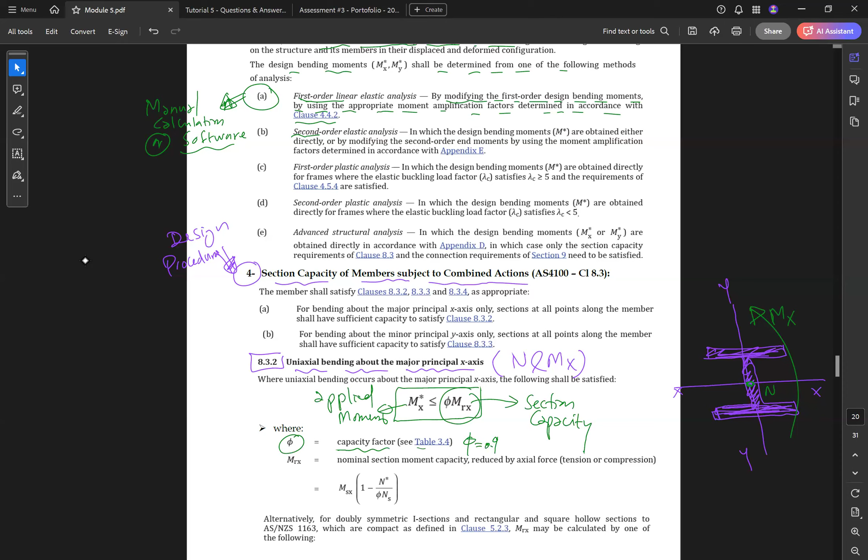So the maximum moment Mx star should be less than or equal to phi Mrx. This is the applied moment, and this is the section capacity, where phi is the capacity factor, equal to 0.9, or from table 3.4. Mrx is the nominal section moment capacity, reduced by the axial force, tension or compression, due to the existence of N.

So Mrx equals Msx, which is the section capacity, times 1 minus N star over phi Ns. Okay, so this is the general rule.

For doubly symmetric I sections, for special cases like symmetric sections, for compression members with Kf equal to 1 - the shape factor, if you remember - if the shape factor is 1, and for tension members, you can take the formula as Mrx equal to 1.18 Msx times 1 minus N star over phi Ns.

For compression members where Kf is less than 1, so if the shape factor is less than 1, this is the formula: Mrx equals Msx times 1 minus the same formula but multiplied by this factor, where lambda w and lambda wy are the values of lambda e and lambda ey for the web. So lambda w is lambda e web, lambda wy is lambda e web yield.

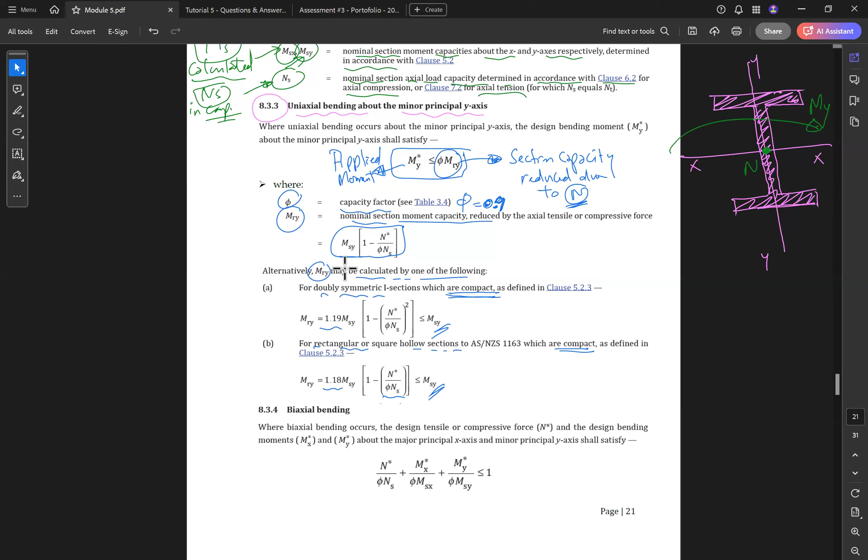So this is the second case, similar to case 1. The third case is the biaxial moment. In the biaxial moment, we have 3 applied actions: N star, Mx star, and My star, all applied together.

So the formula becomes this one here: N star over phi Ns, plus Mx star over phi Msx, plus My star over phi Msy, should all be less than or equal to 1.

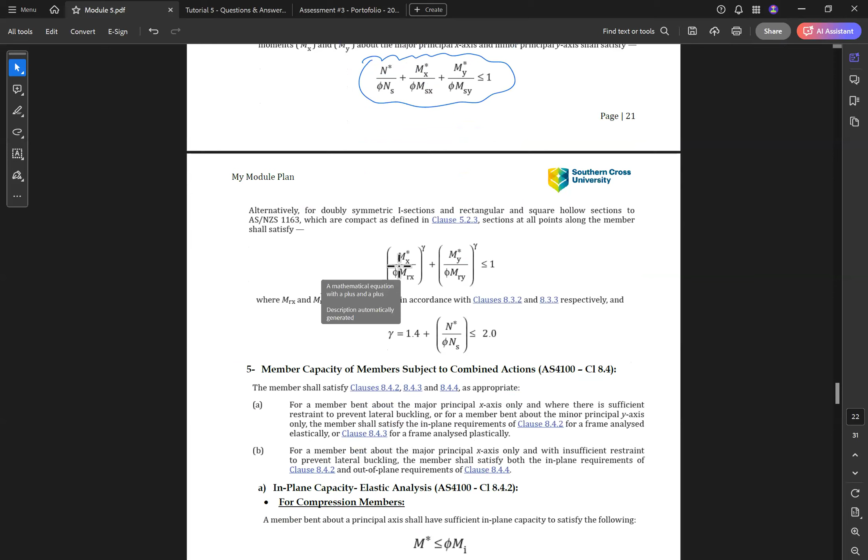Okay, so this is the case, and this is axial. This is bending moment about x, and this one is bending moment about y.

For double symmetric section, I section, and rectangular section, hollow section, any symmetric compact section, the formula can be: Mx star over phi Mrx to the power gamma plus My star divided by phi Mry to the power gamma, and should be less than 1. Where Mrx and Mry are calculated as we calculated earlier in the previous procedure steps, and gamma equals 1.4 plus N star over phi Ns, and should be less than 2.

So all of this procedure covers three types of loading cases for section capacity. We should also have member capacity, so we have member capacity for combined action. The first part was section capacity and the second part is member capacity. And here again we have three cases. We have in-plane capacity.

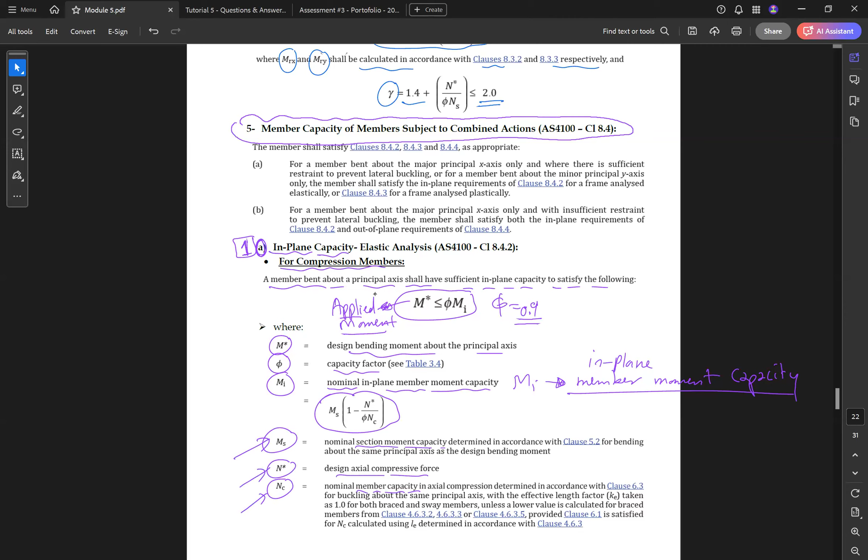Mi is the nominal in-plane member moment capacity. And Mi equal to Ms times 1 minus N star over phi Nc, where Ms is the nominal section capacity, N star is the design axial compressive force, and Nc is the nominal member capacity. All of this has been calculated earlier, or we have spoken about them earlier.

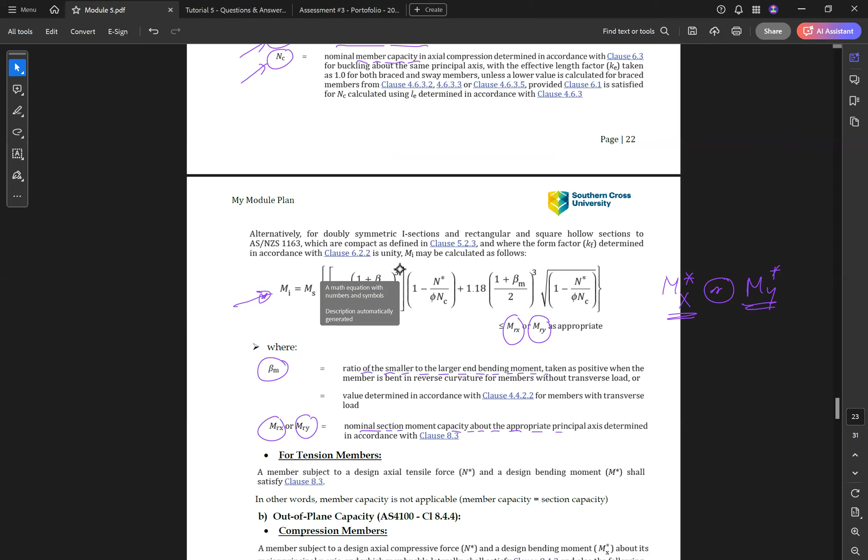Another option for doubly symmetric sections, you can use this long formula here, where Mi equal to Ms times 1 minus (1 plus beta m over 2) to the power 3, all multiplied by 1 minus N star over phi Nc, plus 1.18 times (1 plus beta m over 2) to the power 3 times root of 1 minus N star over phi Nc, and should be less than Mrx or Mry depending on whether the moment star is Mx or My, where beta m is the ratio of the smaller to larger bending moment. Mrx or Mry is the nominal section moment capacity about the principal axis, if My or Mx.

If the member is subject to tension, N star, the design bending moment shall satisfy clause 8.3, or in other words, member capacity is not applicable, so the section capacity equals the member capacity. So if we have a tension member, there is no buckling in-plane that will happen, so there's no meaning for Mi, and Mi in this case will be equal to Ms. Because tension doesn't cause buckling, the capacity of the section will be equal to the capacity of the member.

The second type of behavior is out of plane. Again we have a compression member, subject to axial N star and bending moment Mx about their major axis. So here for out of plane we have Mx star as one case, My star as a different case, which may buckle laterally. We should satisfy the following: Mx star, the applied moment about x, should be less than or equal to the capacity phi Mox, phi equal to 0.9, and Mox will be the nominal out of plane buckling equal to Mbx times 1 minus N star over phi Ncy, where Mbx is the nominal member capacity of the member without full lateral restraint and bent about their major x-axis.

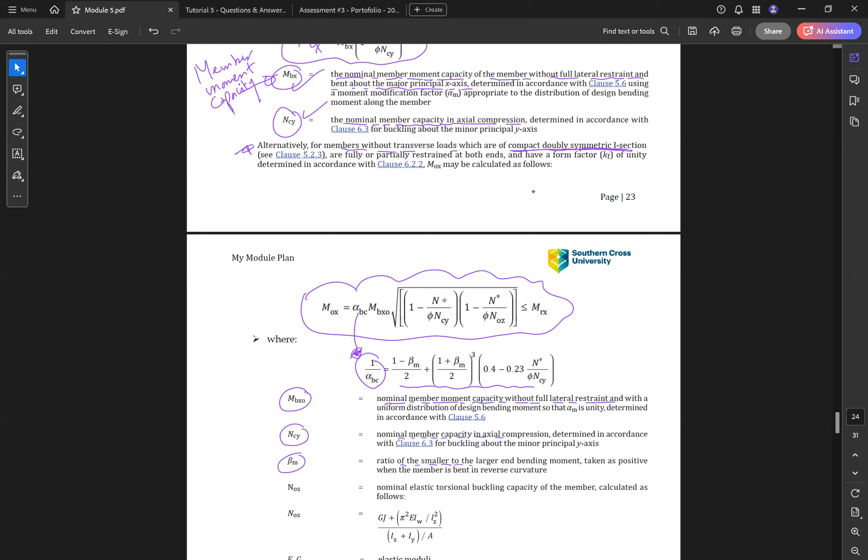So for all formulas, if we have a compact and symmetric section, there is a simpler calculation given directly. Mox equal to alpha BC times Mbxo times this root, where 1 over alpha BC equals this formula to find alpha BC. Mbxo is the nominal member capacity without full lateral restraint. Ncy is the nominal member capacity, beta m is the ratio of smaller to larger moment. All of this has been calculated earlier.

The new parameter here is Noz, the nominal elastic torsional buckling capacity of the member, which can be calculated using this formula: Noz equal to GJ plus pi squared EIw over Lz squared, divided by Ix plus Iy over A, where E and G are elastic moduli, Iw, Ix, Iy, and J are section properties. Lz is the distance between partial and full restraint. So if we have a column with full restraint at both ends, that distance is Lz. So this was for the compression member here.

If it is a tension member, a member subject to design axial tension and design bending moment Mx star, which may buckle laterally, we have Mx star, the applied moment, should be less than or equal to phi Mox, which is the member capacity.

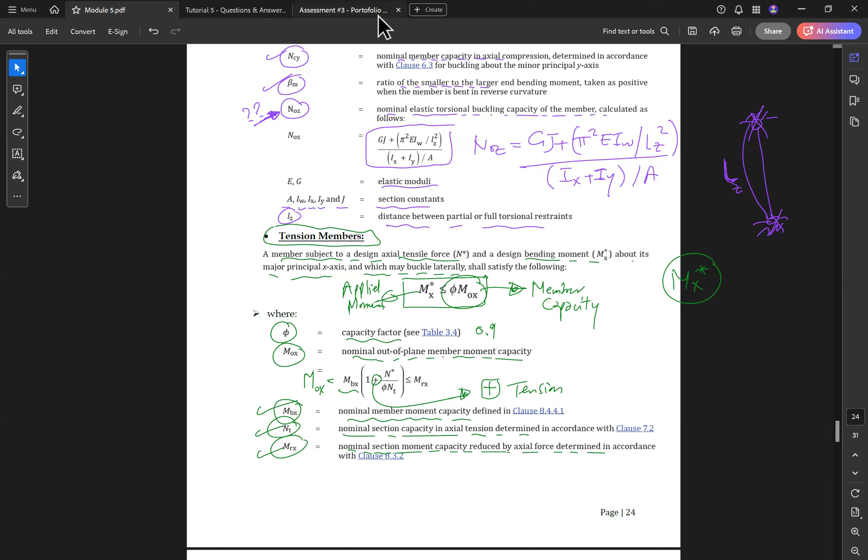Sorry, Ahmed, I just need your help. Are you able to check your email? I have some issue with my quiz. Okay, no worries, I will check the email after the lecture. Have you sent the calculation by email? No, I haven't, I'm still doing the quiz now, and I couldn't open it. It says it's open in another window, but I didn't open it in another window. I'm not sure why it's saying that.

Can you send an email to Guoyang? As to who, sorry? Guoyang, he is a unit assessor and he can help you solve this issue. Do you have the questions or you don't have the quiz question? I have the question, but can you tell me where I can find his email? He's on the course information, his name is Guoyang. Okay, I'll check now. And in the contacts. Oh, okay. What if he didn't answer? Do I just submit it and send it to you by email? Yes, by email. Okay, thank you. No worries.

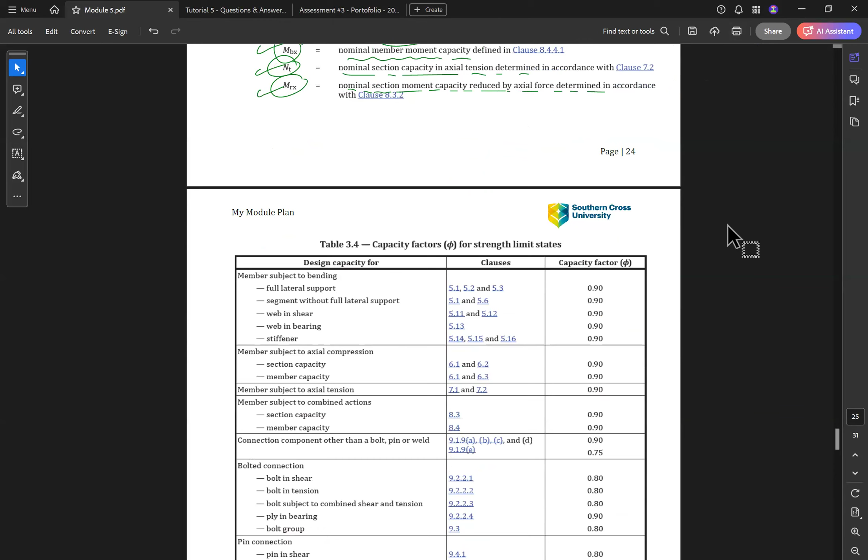Okay, so again, just to go back to the formulas we have. So this is again the table for phi, which we have already discussed before. Most of our calculations, phi is equal to 0.9. Only a few, for example in the connection, it becomes 0.75, or in some other connections it becomes 0.8. So for most calculations, like members subjected to bending, axial compression, axial tension, and combined action, phi is generally equal to 0.9.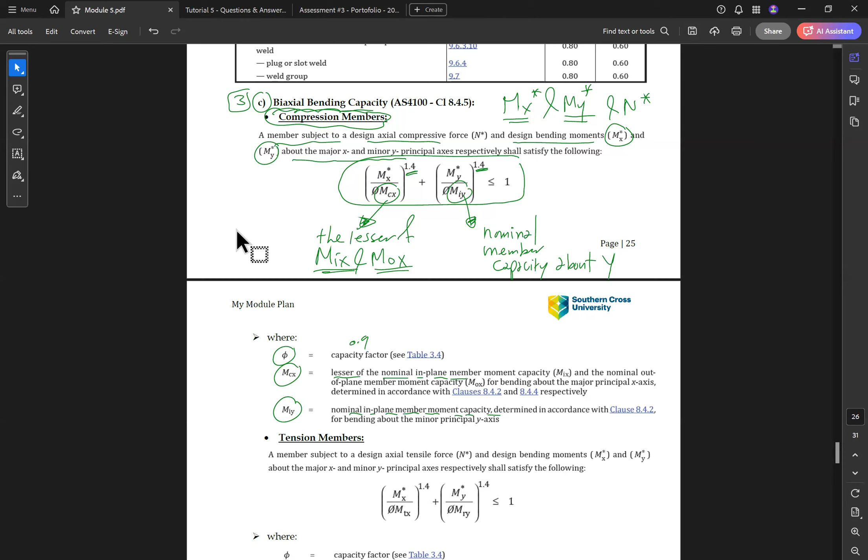If it is a tension member, we have a similar equation, but the difference is that instead of member capacity, it becomes section capacity. For tension, because tension doesn't cause buckling, we have MTX, the lesser of the nominal section capacity MRX, and the nominal out of plane member capacity MOX. MRX is for in plane, MOX is for out of plane. MRY is the section capacity in Y.

So these are the three cases. To summarize, we have three checks or three behaviors of the combined action. But we will only have all three if we have biaxial bending. In some cases, if we have only one moment, we have two behaviors: the first is in plane behavior, the second is out of plane behavior. This applies if we have M and N. And if we add, we have Mx and My and N, we have N and Mx and My, so we might have the third one, which is the biaxial behavior.

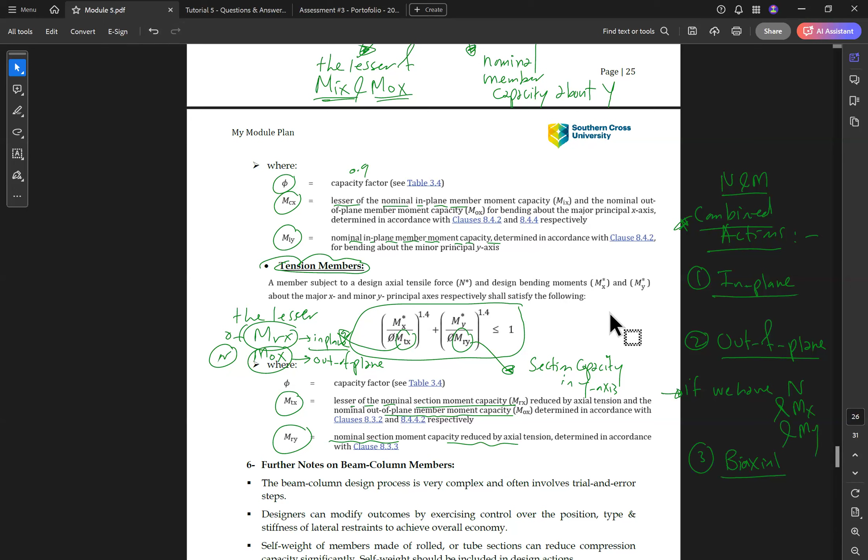So this is what we have about the combined action, and any member of the frame shall be subjected to this combined action. So you have to consider the combination.

Some notes about beam column members. The beam column design process is very complicated and involves trial and error. The designer can modify the outcome by controlling the position, type, and lateral restraints, adding or removing them to make the design more economic. Self weight of members made of rolled or tube sections can reduce compression capacity significantly, so self weight should be included in design action because it reduces buckling capacity and should be taken into consideration.

Adequacy, efficiency, and economy of the solution should be subjected to review appraisal, and what-if analysis should be taken. So these are just general notes here.

This is a summary of the design procedure. The following procedure begins with a lower tier approach, which may be suitable for ordinary building structures but tends to be conservative. Thereafter, more economical higher tier designs are highlighted. So the first step of our design for a frame is the frame analysis.

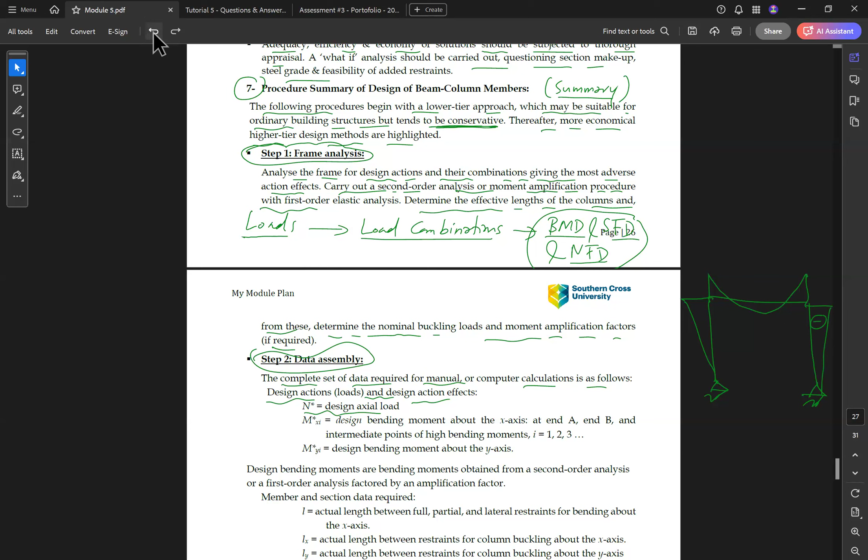this is our bending moment diagram. So you need to, and this is also our normal force diagram, for example.

So for example, if we are designing column C1, we need to calculate the maximum moment, Mmax, here. This is Mmax for the column, and somewhere here is Nmax. So you have to find M star. We have N star here, and this here is M star, and this is Mx, so this is Mmax.

So using the analysis, we get the design axial load and design bending moment about x at end A and end B. For example, if we have two ends, the moment here equals 0, and equals Mmax. And if we have another moment about My, the design actions will come from the analysis of the frame.

Then the design bending moments are obtained from second order analysis, or first order analysis with an amplification factor. So if you have second order effects, you need to consider using the amplification factor.

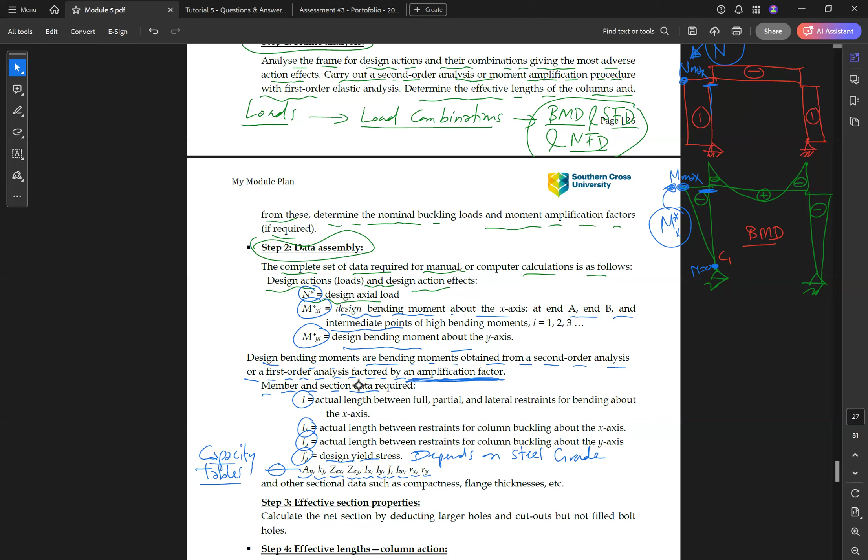Then the third step is effective length properties or effective section properties. We need to find lambda effective, lambda EX and lambda EY, and check if the section is compact or non-compact, and so on.

Then effective lengths, column action. For the simple method of calculating the column effective length, we have this calculation: Lex equal to Ke times Lx, Ley equal to Ke times Ly. If you remember from last week, the simple formulas from the table: if it is pinned, K equals 1. If it is fixed, K equals 0.7. And if it is fixed-pinned, K equals 0.85. So this is the effective length if we are designing a column.

Then step 5, column slenderness. The slenderness reduction factor refers to the reduction of the section capacity to account for column slenderness. So we have alpha Cx and alpha Cy for the member capacity of the axial compression member.

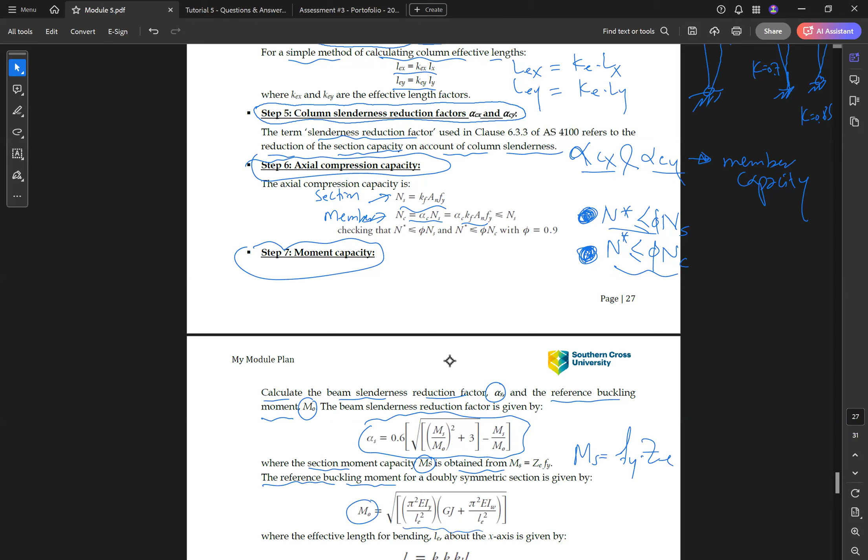Alpha S, or the reduction factor, equals this formula, where section capacity MS is obtained from MS equal to F yield times ZE, Z effective. And the reference buckling moment MO uses this formula, where the effective length LE uses this formula,

KR times KT times KL times L. The nominal member capacity is MBX equal to alpha M alpha S times MSX, where alpha M is the moment modification factor and MS is this one here, Z effective times F yield.

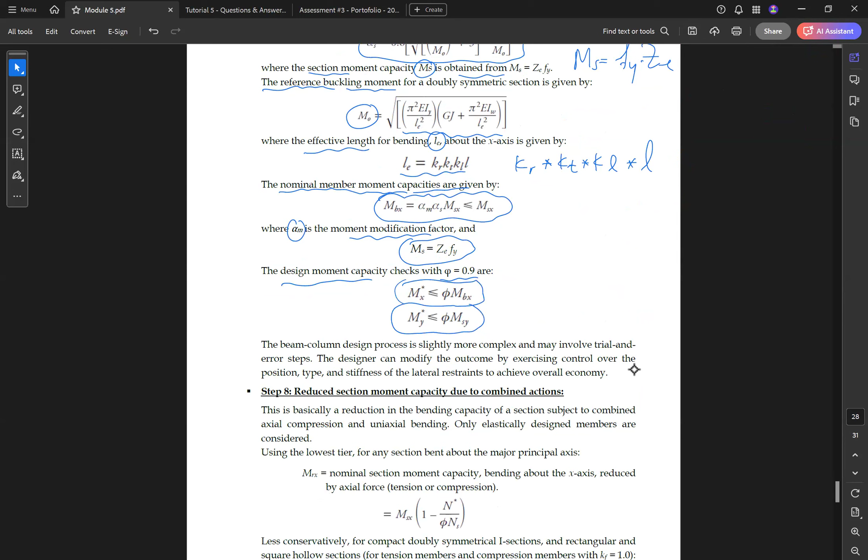The design moment capacity check with phi equal to 0.9 is one of these two, depending on the type of moment. If we have MX, check with phi MBX because it is member capacity, and MY star less than or equal to phi MBY because it is member capacity.

The beam column design process is slightly complex and may involve trial and error, so the designer can modify the outcome by exercising control.

The next step is step 8: reduce section capacity due to combined action. So step number 8 is section capacity due to combined action. This is basically reduction in the bending capacity subject to combined action, compression and uniaxial bending.

In this case we have M and N, and M can be MX or MY. Using the lower tier for any section bent about the major axis, MRX is equal to the nominal section capacity bending about the x-axis reduced by axial force, tension, or compression. So this is the value of MRX.

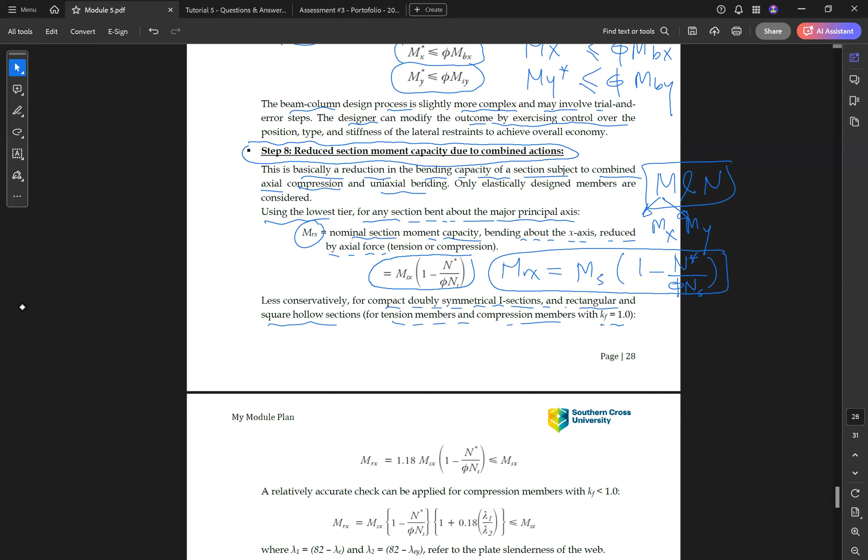MRX is actually the section capacity but reduced with this factor, 1 minus N star over phi NS. So this is the MRX. And for compact doubly symmetric section, square hollow section for tension member and compression member with Kf equal to 1, we can use this formula.

And if less than 1, we can use this formula.

For any section bent about the minor principal axis, MRY is the nominal section capacity bent about the y-axis reduced by axial force. So if it is My, MRY equals MSY times 1 minus N star over phi NS. And for symmetric section, compact, we have this formula.

And the checks are again MX star compared to the section capacity, phi MRX, and MY star less than or equal to phi MRY.

Step number 9, if we have biaxial moment, we have to use this interaction formula, where N star over phi NS plus MX star over phi MSX plus MY star over phi MSY should be less than or equal to 1.

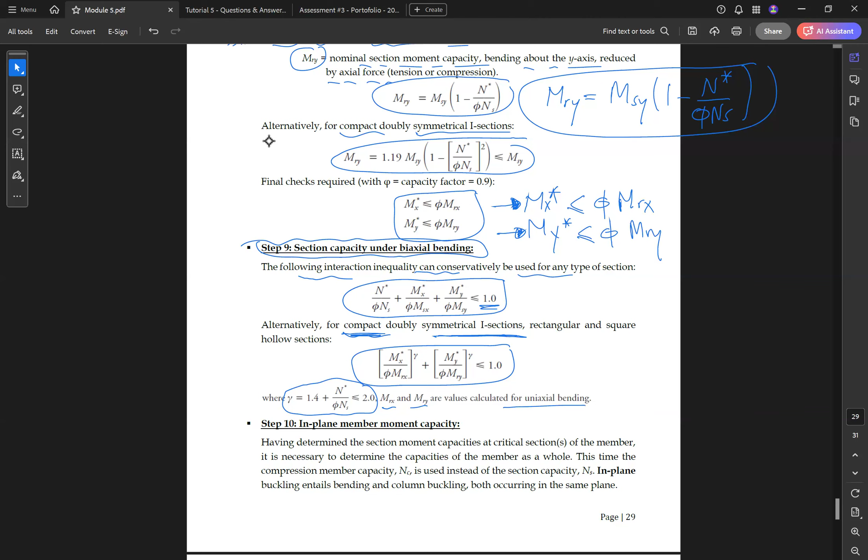Step number 10, if we have in-plane member moment capacity behavior, we have MIX and MIY. So one of these cases.

For MIX, if we have MX, equal to MSX times 1 minus N star over phi NCX, where NCX is the member capacity of the member under compression.

Then step 11, the out of plane member moment capacity. We have MOX equal to MBX times 1 minus N star over phi NCY.

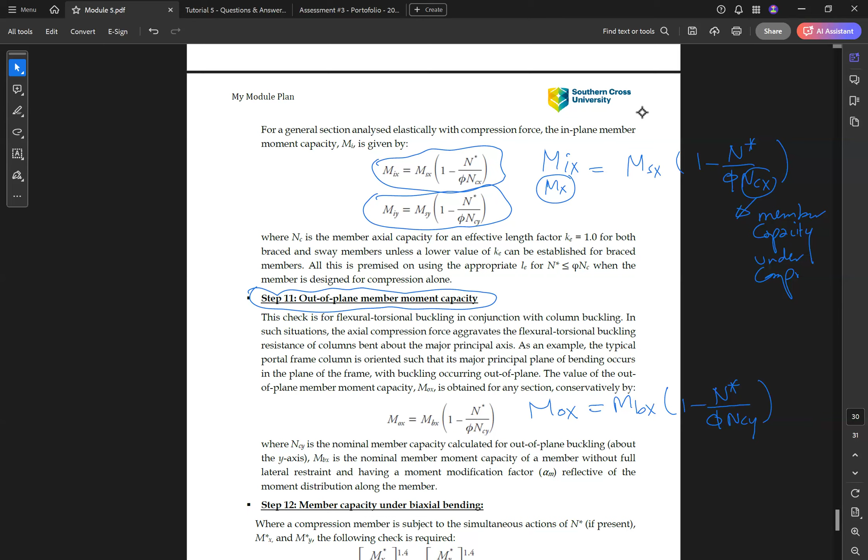Step 12, if we have biaxial moment, we have this formula where MCX is the lesser of MIX or MRX, and MIY is the member capacity of the member about the y-axis.

Again, the self weight of the member reduces the buckling, so it should be taken into consideration. And then the final step is a design overview to satisfy the economy of the solution.

This is just a summary for what we have done for the beam column members, and that's the end of this module. Do you have any question, guys, for the design of beam column members?

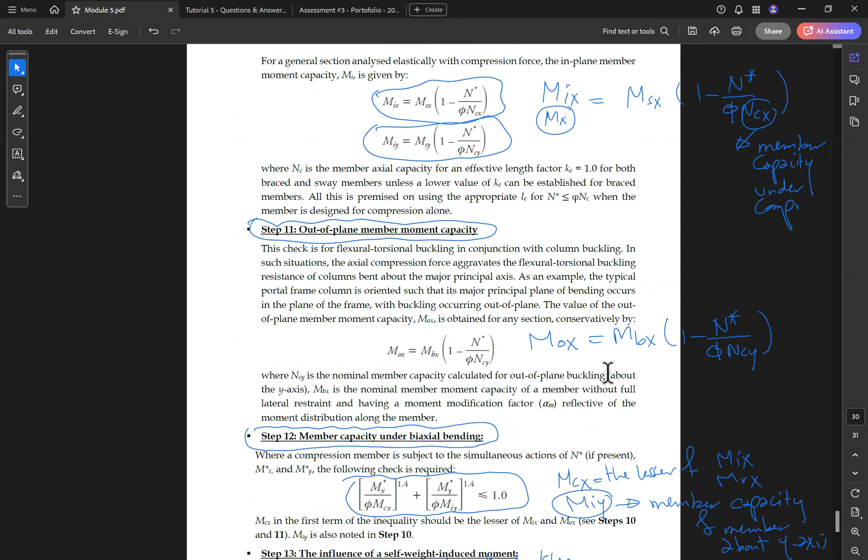Thanks, Nick. Do you have any comments, guys, or any other question? All good to me, thank you.

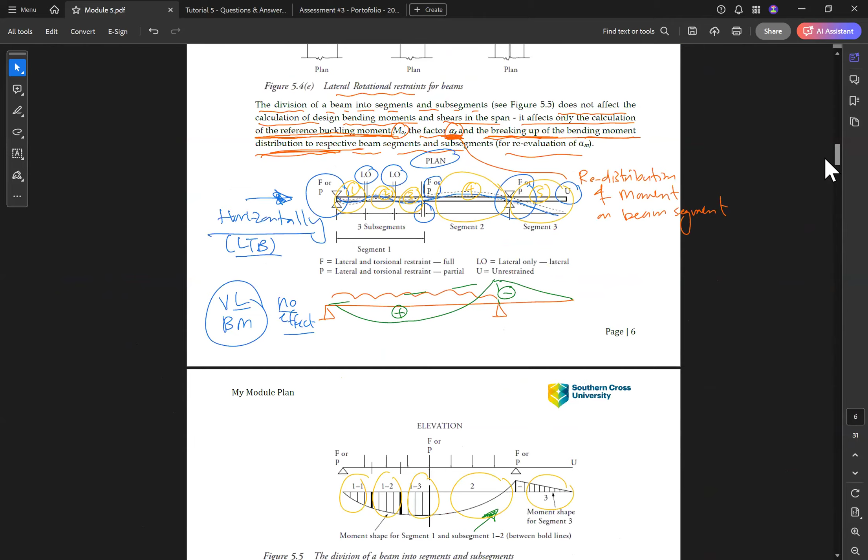No, as you know, all cases will not happen at once, so we just take all the cases just for explanation. But when you are designing a member, not all of that will be included in one case. Are you aware of that? Yep. Okay, that's good.

Okay, so, do you have the tutorial example? We can have some example. Just give you time to define this one.

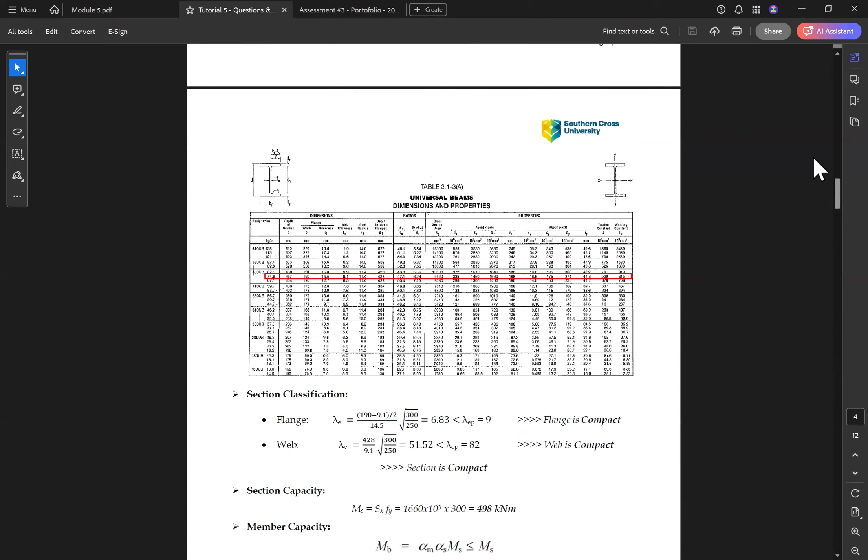Okay, can you please try this example number 2, please?

You guys, do you have the questions? I think the answer as well is provided. So can you have a trial with this one, please? And let me know if you have any question.

Yep. Yeah, good, thanks. No worries, thank you.